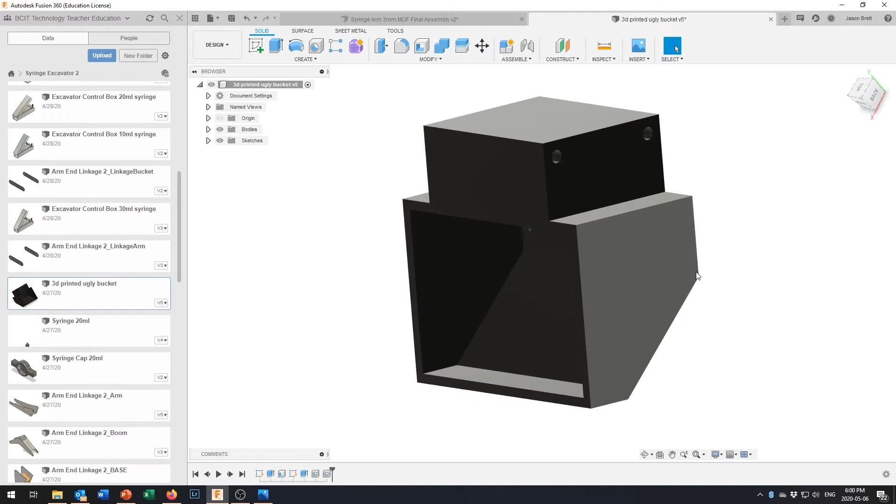Well, welcome back. We're nearing the end of our syringe robot arm excavator project, and today's project is to build one of the very final elements that we need, and that is going to be the bucket for scooping up the dirt out of the pit.

Before we get to building the bucket, let's take a look at what we need to think about. I've started almost all of the videos with a little snapshot of a drawing, and I do have a sketch of where we're going to go with this, but I think it's important for us to take a moment and actually do a calculation, or at least think about the calculation, before going in to start generating our bucket.

The big question we want to answer right now is how much am I going to be able to lift with this arm? Okay, and oh, singe - obviously I don't have spell check in my pen. But let's take a look at what this arm is going to be doing here.

Our arm's right here, and our bucket's going to be out at the end of the arm. When we reach down into the pit, that bucket has to be able to pick things up, pull it out - it's got to be able to lift the dirt. Then we've got to be able to extend that arm out to right here and lift that all the way up. Now we've got one syringe right here pulling this in order to extend this arm.

And we've got this weight out here. I think we're going to be okay for this syringe extending, and it should always compact okay because it's always going to be under compression. The 30 milliliter syringe should have no problem generating enough force to push this entire assembly up. We've got a nice long lever arm right across here.

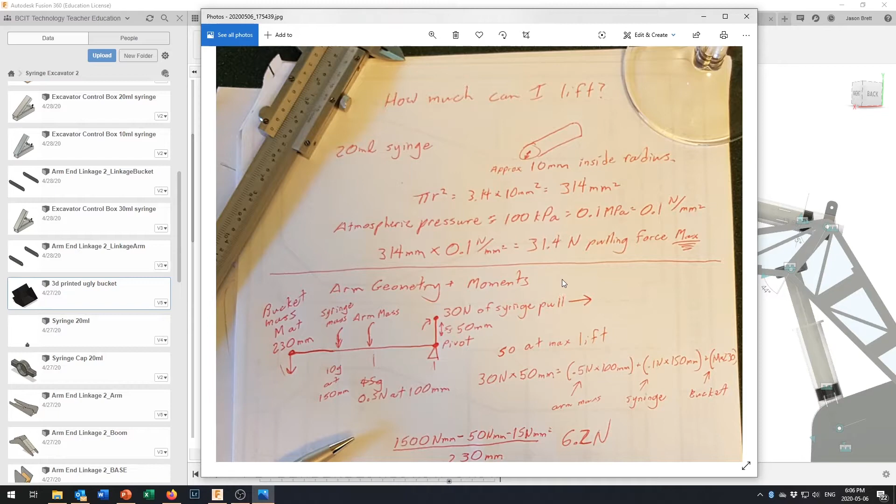Okay, so now let's take a look at how this works out on our arm. So we've got a pivot point on our arm right here, and I've simplified a little bit, moved this up to a nice 90-degree angle so that our math works easier, but I've sort of fudged on the length right in here. So again, we're roughing things out. When you do your calculations, so long as you're reasonably conservative and you don't need to calculate to the nearest significant figure, you can make these approximations to give you an idea of what's likely to work.

All right, so we've got 30 newtons of syringe pull activating right back here. That's going to give us a moment pulling backwards of 30 newtons, and it's going to be activating at about 50 millimeters. Well, where did I get that 50 millimeters from?

Well, I came into this drawing right here, and after doing the little look at right here, we've got this really neat measure tool under inspect, and I was able to come down here and pick that surface - oops, that's telling me 75 for some reason. That's going diagonally on there. I don't know why it picked that. Let's just close that and try that again. I think it gave me the wrong surface because I was just looking at the 2D perspective. And right in there, and I'm not quite sure why it's giving us that blurry figure.

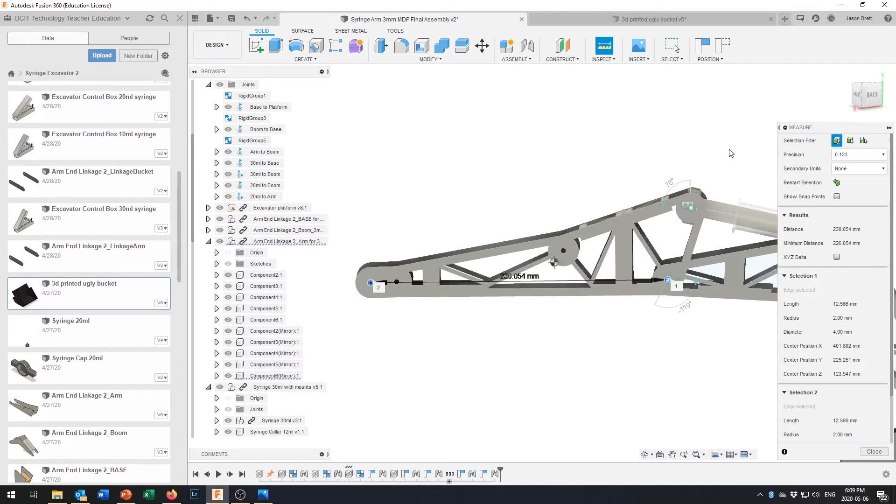Let's take one more measurement and come in right here. And what I want to measure is the measurement to this little point right there. Now, what's that point?

Where did it come from? How did I get it? Okay, so what I did in order to get that point...

I took this piece right here, and you can see I've trussed mine out. If yours isn't trussed out, you're going to have a different mass, and it's going to be in a different place, and that's okay. You'll see here why I think trussing this out makes a difference. I was able to get rid of about half the mass by trussing that out.

But let's come in here at the arm linkage arm right there. So find the object that you're looking for, and if you've assigned it a material, right click on it. What we'll do is pop this up and take a look at properties.

Properties right here is going to give us the mass of this part, and it can give us the mass because it's calculated the volume of that part, and it knows that it's made out of MDF, and it knows the mass of MDF, so our part is going to weigh 48 grams. Of course, I've rounded that off to 50 to make our math go a little bit easier.

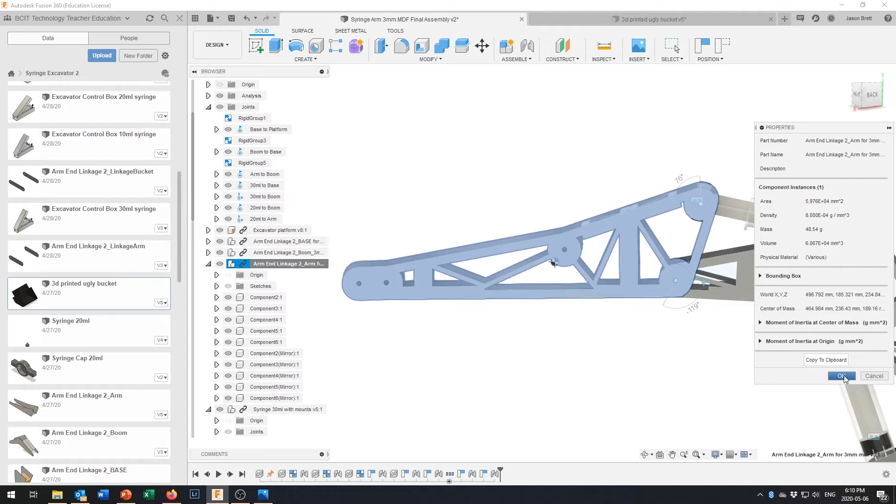Now, the thing we want to know is where is the center of mass for that. The point where this would balance. If you could balance everything on a pinhead, where would that pinhead be to make everything balance? That's what this little glyph, as they call it, is for.

If you come up to inspect right in here, you can pull up center of mass. So if you've got an object selected, just come in here, tell it to show us the center of mass, and you could pick the center of mass for any object right in here.

So for instance, if I needed to know the center of mass for that arm, I just say OK right there. And for some reason, it gave me the center of mass out there, which doesn't really look like where the center of mass for that arm would be. Oh, that's the center of mass for the two combined arms. Pardon me.

Let's get rid of that. This is the center of mass for just this one arm right here. And so you can measure the distance to that.

Let's go to inspect. Pick that hole right there. That's the point everything's pivoting about. And come out here and move this around so you get the center of mass.

Now that's telling me 96 at a bit of an angle. And I think for my calculations, you'll see that we rounded that off again. In this case, we rounded it up to 100.

So we rounded the mass of the arm up from 45 grams to 50 grams, which comes out at 0.5 newtons. We rounded the distance up a little bit to 100 millimeters. Again, not huge rounding up, but if you're going to round somewhere when you're estimating these things, here, this is good, this is working in our favor, so I tend to round up.

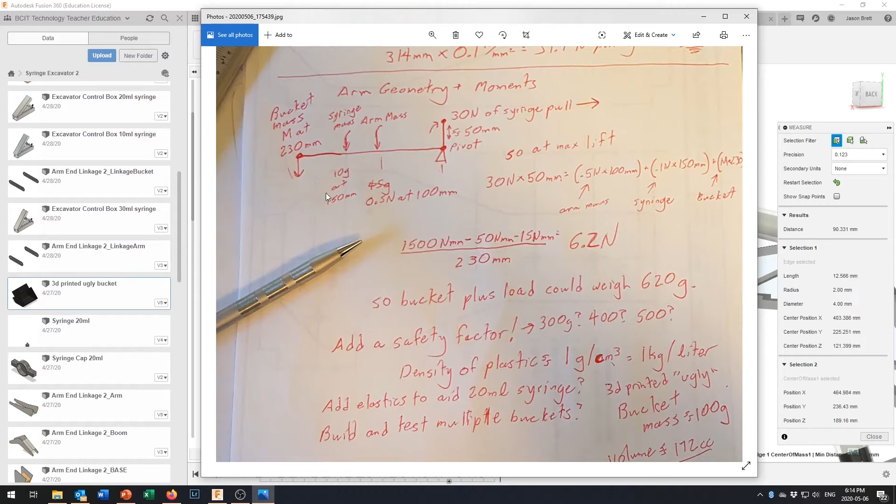That's about 600 grams, which is a lot - like 2 pop cans or something. That's a pretty heavy load, and I don't think we're actually going to be able to lift that much. So what do I do with that number? Well, I say our bucket plus the load could weigh 620 grams maximum, but I really doubt it.

We've got things to overcome, like the friction of the plunger inside the cylinder, the friction between the arm and the boom, and the chance that something's a little bit sticky or not perfectly lined up or not working perfectly. So we're going to add a safety factor.

It depends what you're adding for your safety factor and how brave and bold you are. I think it's reasonably conservative to say that if your bucket plus its load weighs 300 grams, you're probably going to be fine for what you want to lift. If it weighs 400 grams, you'll be working and might start to see some bubbles forming in your arm, but you can probably get it out there - maybe just don't take as big a scoop every time. If you go up to 500 grams, you're probably pushing it.

If you go to 600 grams, I'm pretty sure that's not going to work. So it depends - if you're feeling fairly conservative, make a smaller bucket so you've got a smaller load and a lighter bucket. And if you're feeling bold and want to go for it, make a bigger bucket. You can always make another bucket, because I'm going to show you how to make the bucket in just a moment. It's very parametric, very easy to change, and we've got a couple techniques that make the bucket fairly easy to manufacture.

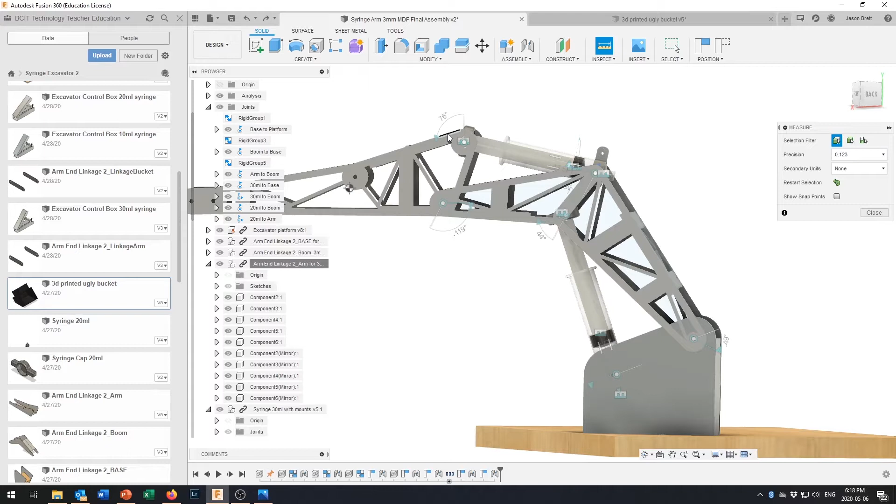Plungers, syringes, cylinders always work better when the fluid is in compression and you're pushing something out, because you don't have the option of putting it into suction—there you're just relying on air pressure. So if you had some elastic bands balanced just right, you might be able to get more force for retracting this and extending your arm.

So you can probably go bigger if you build a bigger arm, and you can probably build a bigger bucket if you use techniques like that. How big? It kind of depends on how good you are at hooking up those elastics and balancing the forces.

So you've got some of that in there. Keep in mind we're going to show you ways to make this bucket that are pretty easy and quick to do, so you might have a couple of different buckets: one is your regular everyday practice bucket, and the big one you go to for competition.

Just as a ballpark, we're going to take a look at the 3D printed ugly bucket. That's going to be the first design that I show you, and then I'm going to show you a sheet metal design.

That 3D printed ugly bucket, when it's all done, Fusion estimates its mass to be 100 grams. It's going to be less than that after we run it through the slicer, because the slicer takes care of the infill density. If you've done 3D printing before, you'll recall we don't actually print solid objects—we give it an infill density. So our bucket mass is definitely going to be less than 100 grams.

One of the interesting areas where parametric solid modeling programs are advancing is in how they model 3D printed parts. Some of them now are starting to do the slicing inside the program, so they can give you the final printed part and its properties. You can come back and do your finite element analysis and mass analysis all based on the part as it's actually going to be after it comes off the 3D printer. Those are new features rolling out in different programs right now, and I'd expect you'd see them being pretty standard in the next 5 years or so.

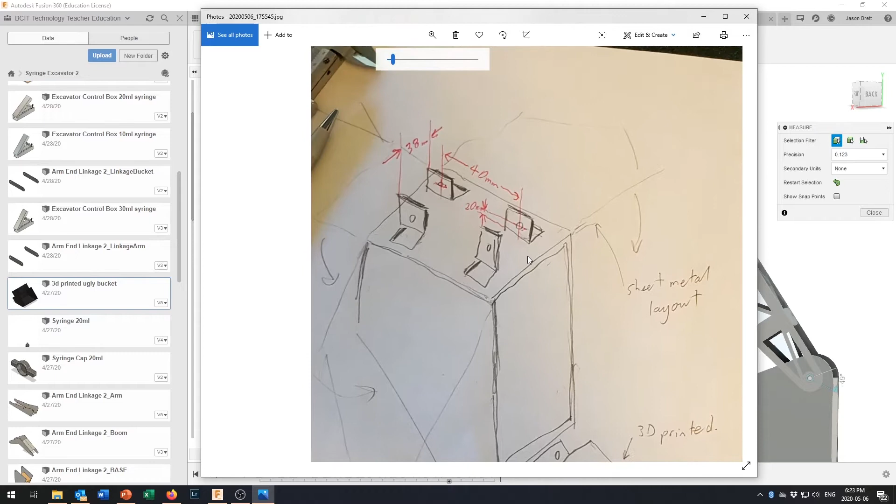Then I was trying to think, well, how do we hook it up into our overall mechanism? What we've got right here is a couple measurements that we already know. If you've got a slightly different design on your arm, that's okay. I'll show you how to get those measurements in just a moment. From outside face to outside face, we're going to want 38 millimeters on my design, and between the holes we're going to want 40 millimeters.

After a bit of playing around with it, I discovered I drew these way too low to the bottom, and that this would have ended up jamming into the arm. This actually needs to come up somewhere around here to about 20 millimeters off the bucket so that there's room for everything to flex and move back and forth before this part jams into the arm.

So where am I getting those measurements from? Well, as you might have guessed, from the measurement tool. Right over here, we can come in here. Let me close this and start a new measurement. If I come in here and pick the inside right there and the inside right there, I've got 38 millimeters on the outside. So if you've got a different design on your arm and you want to go for a different measurement in there, that's perfectly fine. Let me close that.

And for the distance from right here to the end of the bucket, to make sure it all works really nicely, I went back and took a look at our arm end linkage model, the one that we did all up nice and parametrically, where I've got a bucket in there that rotates around. We're going to be able to play with those dimensions a little bit if things aren't working out perfectly.

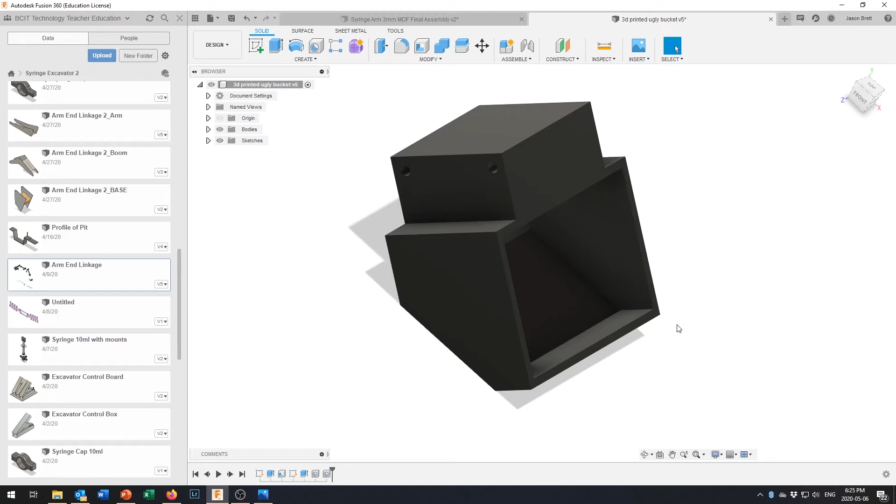This is my 3D printed solution right here. And looking at that, why do I say this is my 3D printed solution? Well, we've got a couple of different... just a minute, I've got to activate my 3D mouse here. For some reason, it always works better if I give it another command first.

Okay, so when I originally designed this, I was thinking that we would end up printing this in this direction right here, because we'd have a nice flat base down here to be our bottom layer that would stick to the print bed. And then you'll notice that my angles right here never exceed a 45-degree angle. In fact, I purposely chose them to be 45 degrees right there and right there. And so long as I don't make those angles too steep coming out this way, you can always print the next layer in your print just a little bit beyond the layer below it.

So we should be able to print this entire model without needing any support material, because this side here also comes up at a 45-degree angle. You might see a little bit of things dropping off right in there.

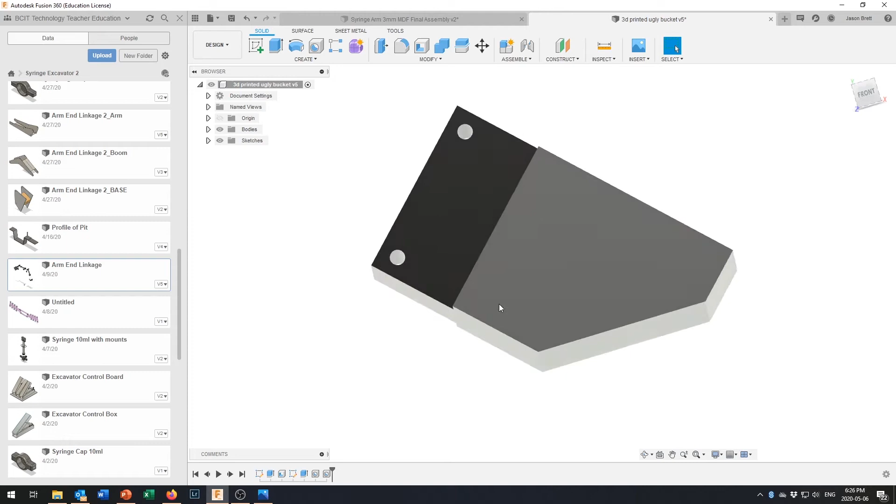Now, after I've looked at it a little bit more, I said, oh well, this is no longer our biggest surface. I had to come up and modify this top part. This would also print really nicely this way. So you can put that down on the bed, and there we go. There's a 45-degree angle right there.

Or what I'm now wondering is the best way... no, that's not going to be the best way to print it right in there, because we're going to have that big flat surface right up at the top. And you need a really good slicing program to be able to knit this top part together when it's unsupported on the bottom side.

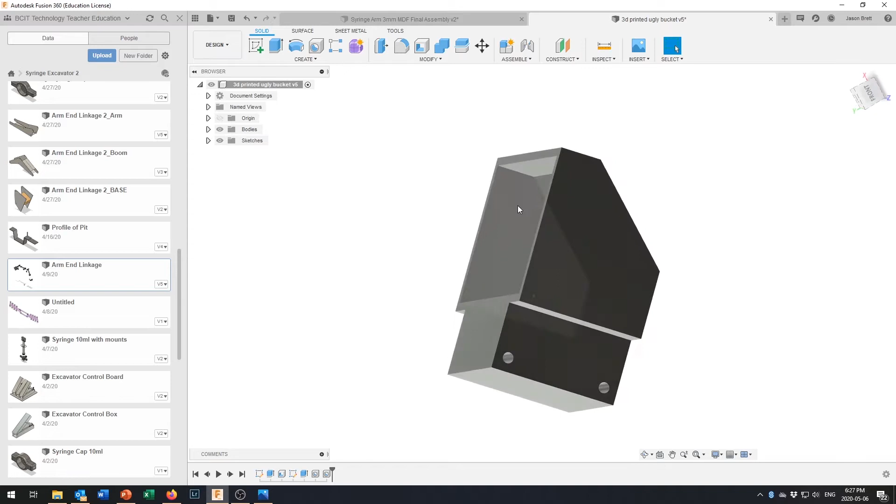So anyways, we've got two different ways that we could print this and make it come together. I'm starting to think that one's kind of nice, but this was my original thought. And you could probably... oh, no, if you do it that way, you've got a problem right in there. So we've got a couple different ways that we can 3D print this shape.

Let me show you how I put this together, because it uses a new tool you haven't used before, and I think you'll really like it. So let's use the history timeline right here. Since I've already made this part, I can drag my history timeline back here, and whoop, that's like I never did any of those things, but it still remembers what those steps were. They're there waiting for me to activate them. You can come back to the beginning and press play, and it will animate the construction and how it all comes together.

Let's take a look at that first sketch I put together. Where did that sketch go? There we go. So all I did was take a look at the profile, and you'll notice I didn't worry about that part going up on the top right here. I just looked at the dimensions of the bucket and said, how big do I want the bucket to be? Honestly, I just ballparked all this because you can come back and change it later if you need to.

But the one thing I made sure of was that when I was dimensioning, I used my dimension tool to set this angle to 45 and this angle to 45. So those parts were in there. This one's a 90-degree angle, meaning this is coming up at 45. So I've got a shape that looks something like that. Now later on when you're all done, maybe you want to fillet a corner or two to make it look a little less ugly. But you know what, 45-degree corners work, certainly for getting all your angles right.

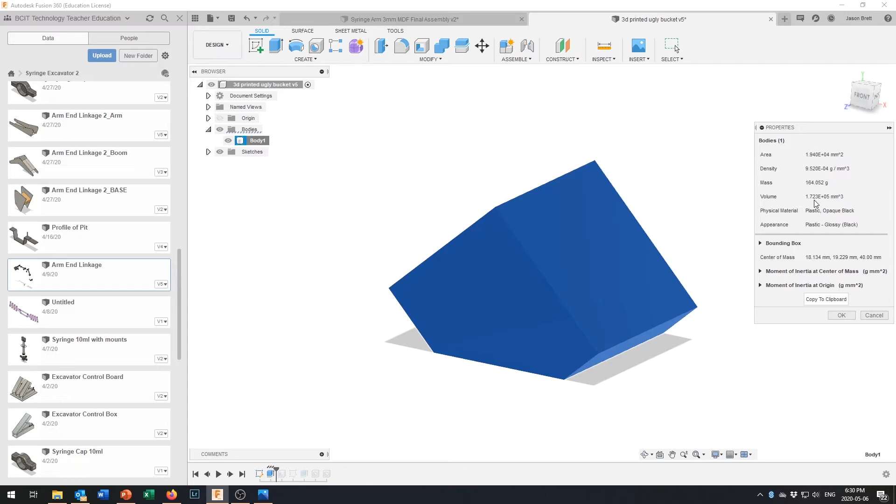The other thing it's got is the volume right here. Now you'll notice this is in millimeters cubed. We want this in centimeters cubed, or milliliters. So remember what I was saying, you've got a factor of 10, but a factor of 10 in height, width, and depth. So that means 10 times 10 times 10, you've got a factor of 1,000. Well, this is 1.7 times 10 to the fifth cubic millimeters. So we've got a factor of 1,000, so we subtract 3. That gives us e plus 2, which means we move the decimal place 2 spots over: 172 cubic centimeters. So that's where that volume measurement came from.

Now this is a tool you probably haven't used before, and it's pretty cool: the shell tool. You'll notice that it just suddenly vacated on the inside right here. So cool. What did I do right there?

Well, there's this tool under Modify, actually it's right up at the top. You click on Shell, and when you've got an object in here, Shell will come in and you tell it which surfaces you want to remove and how thick you want the wall to be. It will go through and remove everything else and just leave the shell of that object behind. So really, really useful tool, and it completely changes how you can design a hollow object. You don't have to design it with thin walls to begin with. You design the outside of the object and then say, make it 3 millimeters thick, please. You just have to remember that you do have to give it an opening of some kind, which is ideal for our bucket because it removed this face right in here and just made everything else 3 millimeters thick.

So that shell tool takes our solid object and hollows it out for us. Now, you can play around with your inside thickness. That's the wall thickness right here. It provides a uniform wall thickness all the way along, and I went with 3 millimeters. That's about 1/8 of an inch.

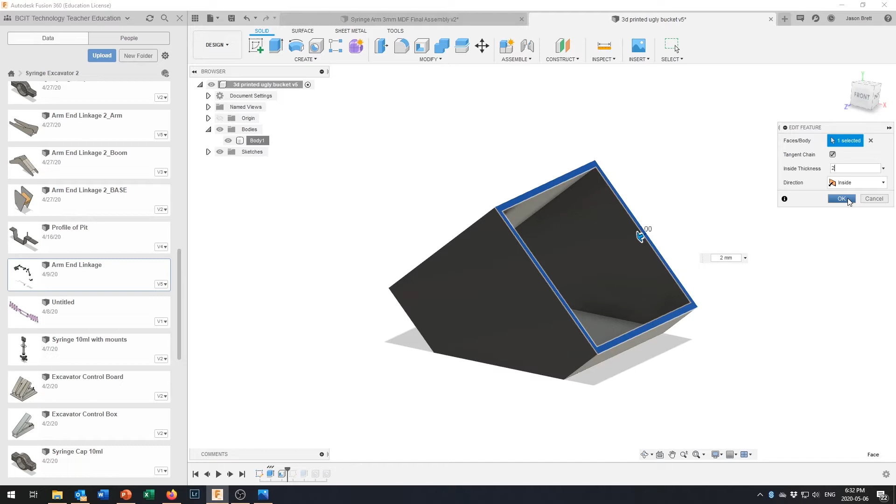Would I go all the way down to 1? Probably not all the way down to 1. But again, it's easy to try and easy to print one out, so when we get back to the shops and you've got a chance to get on the tools, you might choose to do that. So, okay, there we go. We've got wall thickness right in there, just updated that.

And then once we had that wall thickness in there, I came along and created a new sketch because I needed a place to put some holes. Now, this is different dimensions. This was a bucket that I used in my sheet metal design, and there I had to keep the boom and the arm a little bit wider because they had to be able to be bent on the box and pan brakes that we had at work.

With the laser cut stuff, we've been keeping it narrower so that it's smaller and lighter while still remaining nice and stiff. So you're probably going to want to draw a box in here and get it dimensioned.

You can see that I've got the overall dimension right in here. So what I did was I came in and I took a dimension from here to here, and that gives us what's called a driven dimension. You can see that's in brackets right there. When you go to create that dimension, it'll probably give you a warning on that.

You may, in order to make that, need to do a project, and you'll come down in here and you can do a project of it—it'll project that entire surface down there, and then you've got all of these lines in here for making your dimensions.

And then I said, okay, well, I wanted my box to be this wide. I was careful to make sure that I went front edge to front edge. You don't have to—you could move it back a little bit. You can play around with that. Just make sure you dimension it so it's in place.

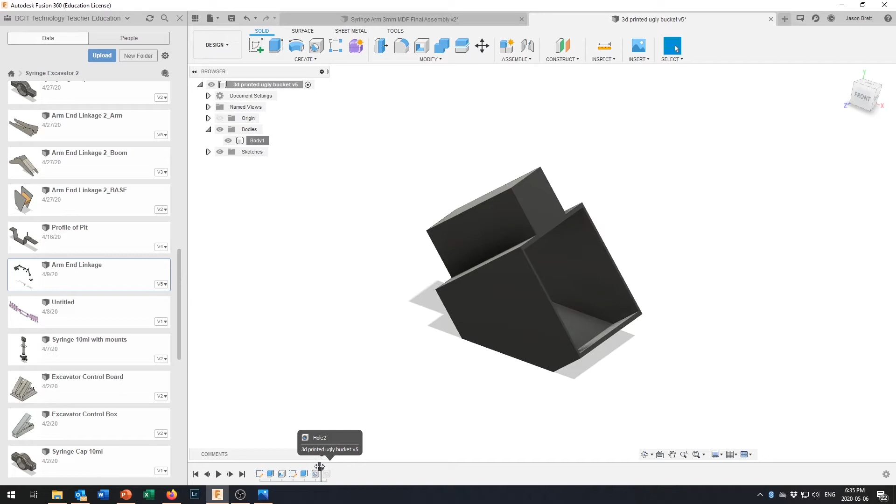So I run the hole command. Oh, let me pull my timeline over one more step. There we go. And if I click on that hole command, remember that you pick the face that you want the hole on, give it a couple of references, and then down in here, you tell it how big you want the hole to be.

And I went with our standard hole for this project, a 4 millimeter diameter, about the right size to let a number 8 machine screw slide through nicely. Okay, so there we go. There's one hole, and then we'll add the other hole in right here. Now we've got 2 holes right in there, and this project is finished, and you have a nice little bucket that you can take into your design and you can mount in there, and your linkage will come down and connect to right here.

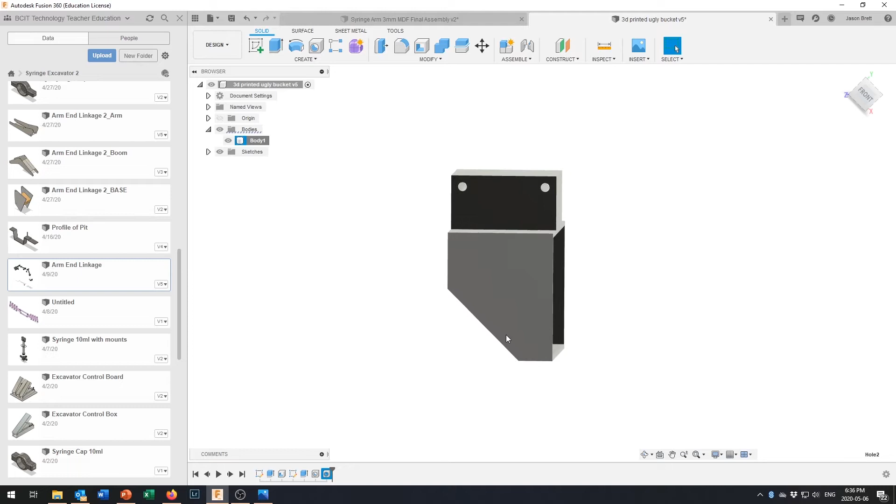Your arm will connect to right here. You'll be able to pull things up, scoop and hold, and dump them out. Can you make it bigger? Yes—maybe by making it longer in this dimension, or deeper in this dimension. Maybe this part right down here comes down a little bit further. Just watch your angles and make sure you always come up with a 3D printable angle.

Perhaps you want to get a bit more space. You could draw a sketch right in here and punch that out to the inside, just so long as you keep it all 3D printable and think about how you're actually going to manufacture it. Should work out fine. Radius off a couple of corners.

Okay, we've got the fillet command for that—can make this look a lot nicer. Just remember, if you fillet that inside corner right there, that's going to make this a little bit wider, and may interfere with the arms, with the sides of your arm that are going to be coming right down in here.

Okay, the bucket is a standalone project. You can build the bucket, it goes into your parts list, and then when you're ready to add it in, you can drag it in right here and add it to this component. But if you're still working on this, don't panic—you can build the bucket. I'm going to be back in just a minute. I'm going to show you how to make it out of sheet metal too.

So if you've got the bucket all made up for a 3D printing file, that's perfectly fine. We've covered how to export an STL in previous files right here. I just want to take a look at how I'd go about designing the sheet metal variant of this arm, or of the bucket.

And one of the things I like to do is, you've often heard me say, is I like to start with a sketch, just so I've got some idea of what the measurements are going to be. And you don't always have to start your sketches blind or from new. One of the things I like to do is combine the currently printed CAD output that I have with the object I want to draw onto it.

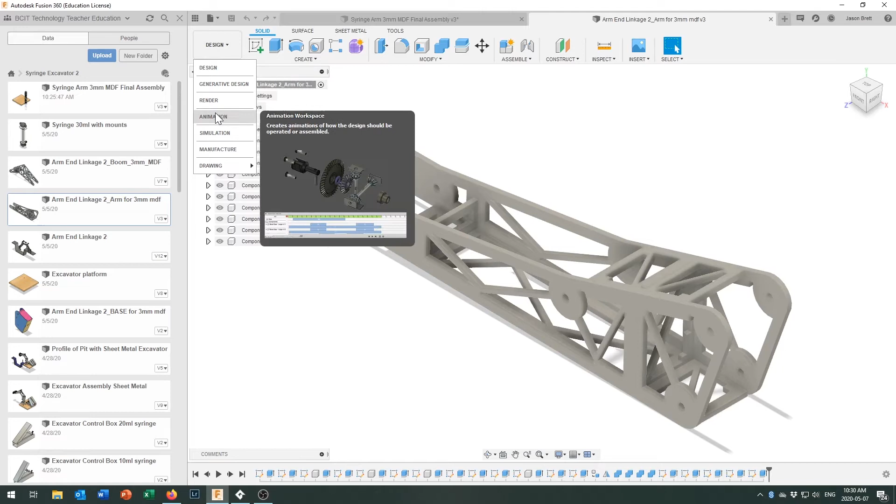And what we're going to do right here is come up to the design and drop that down to drawing, and we're going to say we want the drawing to come from the design. And when I do that, it's going to ask what part I want—well, it's this one right here. We're going to create a new drawing in right here.

And it's going to ask you some things about the template and the drawing that you want—most critically, what size paper do you want to put it on? A4 is the closest approximation we've got to standard letter size paper, and you can choose it in either a wide format or a tall format. I believe this one's going to get me the wide format—if not, I can come back and do this again. But let's go for A4.

It's all in millimeters. And here—there we go. It should have, there we go, popped up, and there's the wide format drawing.

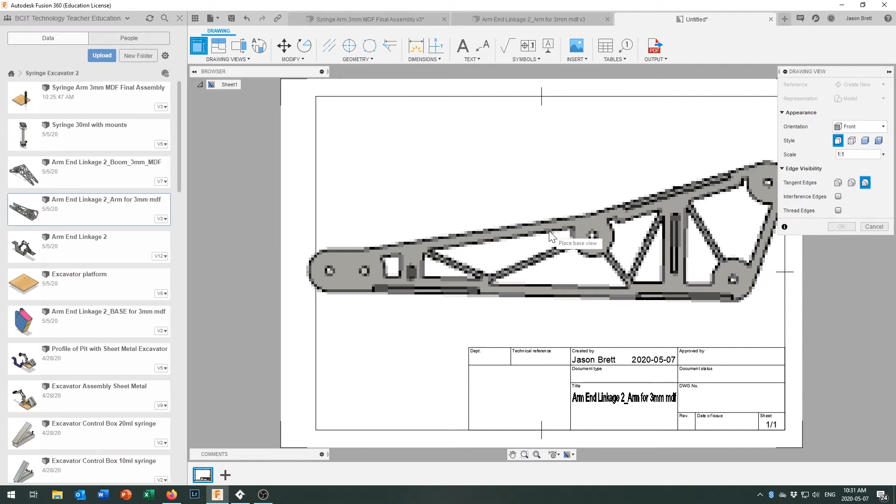Okay, now you're going to be able to place your part in there in the base view, but we want to adjust that scale. So the scale is at 1:1, and that is just barely going to fit in there—it's not going to quite fit inside all the boundaries. And fact of the matter is, I want to leave a little bit of space at the end for doing some drawing.

So I'm actually going to place this over here, not necessarily where I'd be putting it. If I was printing this out as an actual CAD drawing, I'd probably print it out at half scale so that it fit nicely on there. But I want this 1:1, and I want that bucket to be able to fit right in there so I can get a good idea of what it's going to look like when it's sitting right on that arm.

So I'm just going to plop that in right there and say, okay, there's my base view. You'll see that it does a really nice job of putting the base view in there. Shows you the little sections we've cut out for putting it all together. And that's fabulous right there.

Now you've got all sorts of other things down here. You can go in and edit your title block. You can delete the borders if you don't want borders on your drawing. You can delete the title block if you don't want it. Probably not a good idea to do that in general, but for what we're doing right now, using this as a basis for sketching and getting some dimensions, this is probably going to work out a-okay.

So I'm just going to print that out now, and I'll be back with the next step in just a moment.

Okay, I printed that out and then sketched a potential bucket design in on right here. And I think when there's so many ways to build things in Fusion 360... and just as you need to know how to use Fusion 360's tools, you actually need to know how to build things in the real world.

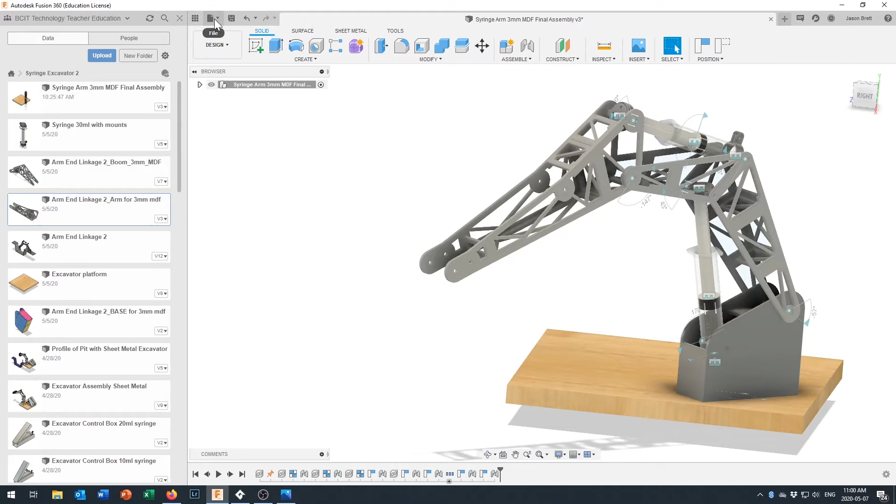Okay, and again, just as with the previous part, even if your arm's a little bit behind and your linkages aren't all working properly, don't worry about it.

You can build the bucket from first principles, and we're going to make it out of sheet metal. So what are we going to need to do? We're going to need to create a sketch, and I'm just going to pick a plane right in here. That sketch is going to be the side profile for my bucket. I really do enjoy Fusion in that I don't have to get any dimensions or angles right. I just go ahead and design something like that, and who cares if it's right or not?

Because what we're going to do now is come along and provide some dimensions. And why is that dimension? What's that little piece doing right in there?

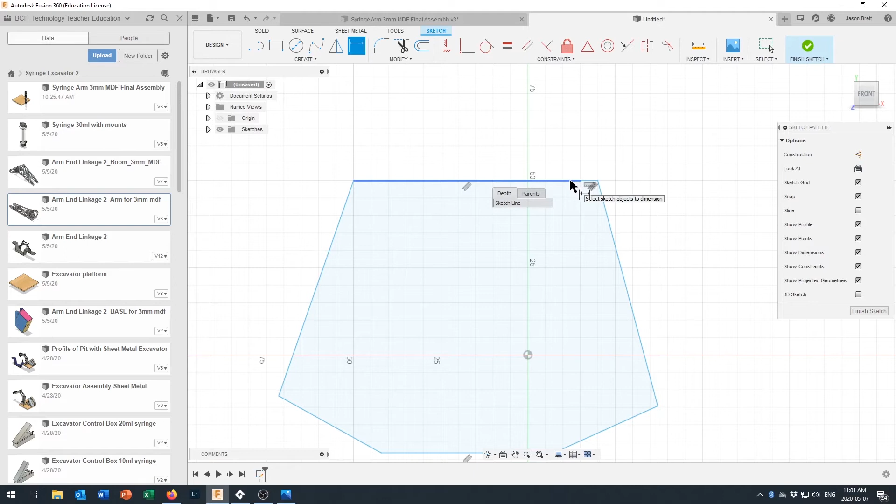Okay, Fusion 360 is messing with me. That should be just a single continuous line along the top right there. I'm just going to delete that and see what happened. Must have had too much coffee and clicked my mouse button too soon.

Okay, there we go. This one right in here is telling you that's a horizontal line, which is good - we do want some constraints on this design. Let's come in here, pull in a dimension right here, and based on my drawing, I think I want that to be about 50 millimeters long.

And then down on the front, I said I wanted this side to be about 70, and you'll notice depending on where I put that, it will either give me an aligned dimension or a vertical dimension. I think I'll go with the aligned along the front, and then I thought each of these sides could be somewhere around 30.

And yeah, that messed it up, but don't worry, we'll fix that up in just a moment. There's no magic to these dimensions that I've got right in here.

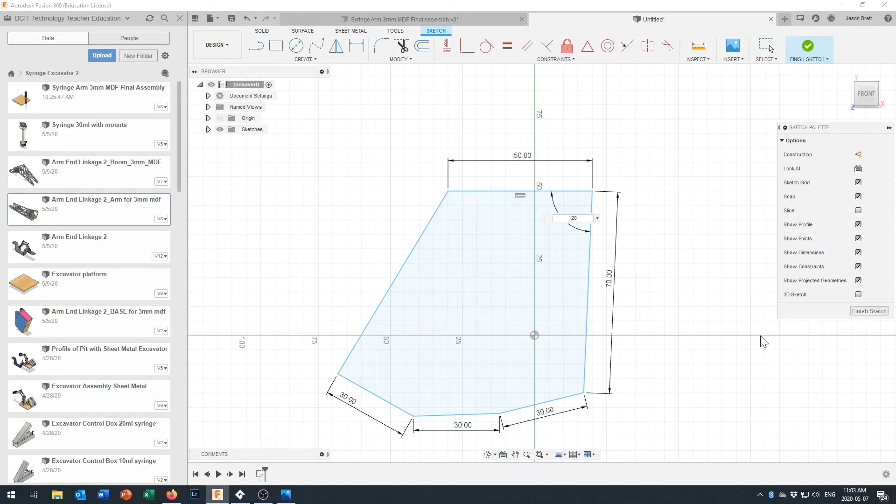Okay, now I'm going to crank this front piece out on an angle a little bit. Right now it's less than 90. We originally had that out at about 120. Let's see what that looks like right in here.

And we get funny dimensions when we come along here, but let's play with that. I think maybe 100, 110, 105 might look good for the front. I don't know, it's your bucket - you decide how you want to design it.

Again, this is one of those things where you'll have to test it, and we probably want this out at a little bigger angle in here. Let's try 100 on there and see what we get. That's looking a little nicer.

And then this piece right here, I think I wanted that - actually, instead of putting a dimension on there, I'm just going to make that go horizontal. There, it was already selected, so when I clicked on the horizontal constraint, it just made that horizontal right along the bottom.

And then I can dimension this angle right in here, and that's telling me, let's make it 150. And then just to wrap that up, I think this is going to tell me that this is an over-constrained dimension, so I'm not going to put a dimension right there because this angle and this angle are controlled by these lengths and dimensions we've got along here.

It knows if this one's horizontal, and this is all in here, we've got this all fixed, and that's looking really good. Okay, so that's going to be the profile of our bucket, and I'm going to finish that sketch.

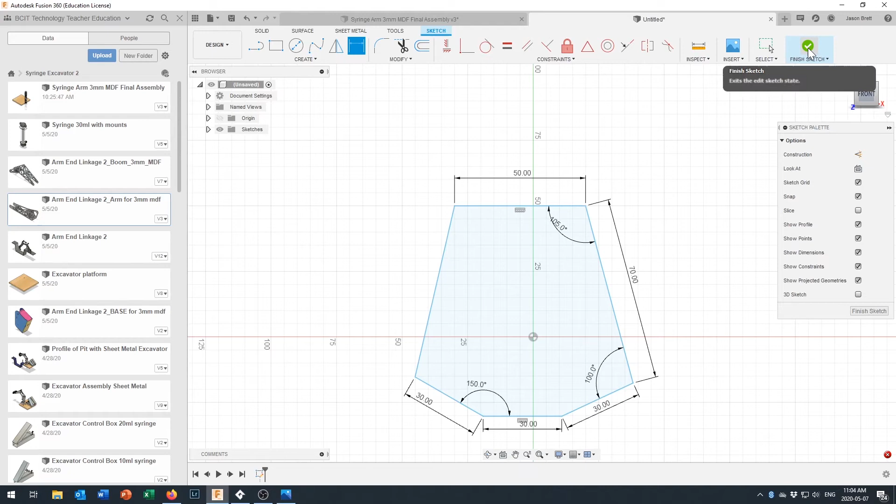And then I'm going to take that and extrude it as a new component. I am going to extrude it 1 millimeter because most of the sheet aluminum I have kicking around the shop is about 1 millimeter thick. There we go, now we've got this 1 millimeter thick piece sitting right in here.

Now what I want to do is convert that to sheet metal. Under create, we can go convert to sheet metal, and I'm just going to pick that component and tell it that I'm going to make it into aluminum 1 millimeter thick.

If you don't have an aluminum setting in here for 1 millimeter thick aluminum, you probably do because we used aluminum in an earlier tutorial. You can come into your library and click on an existing material - that's covered in a previous tutorial, the one where we made the control box. Go in there, edit this, and pick 1 millimeter thick aluminum, and we can fix that up later if needed. Now this has turned into a 1 millimeter thick piece of aluminum.

I am going to create a flange, and that flange is going to come off the top side right here. It doesn't matter so much which way it comes, but I'm going to put it there and have it come out about 35 millimeters. We are going to end up mirroring this part and putting it onto the other side, but for now we're just going to build half of this, and tweak it later.

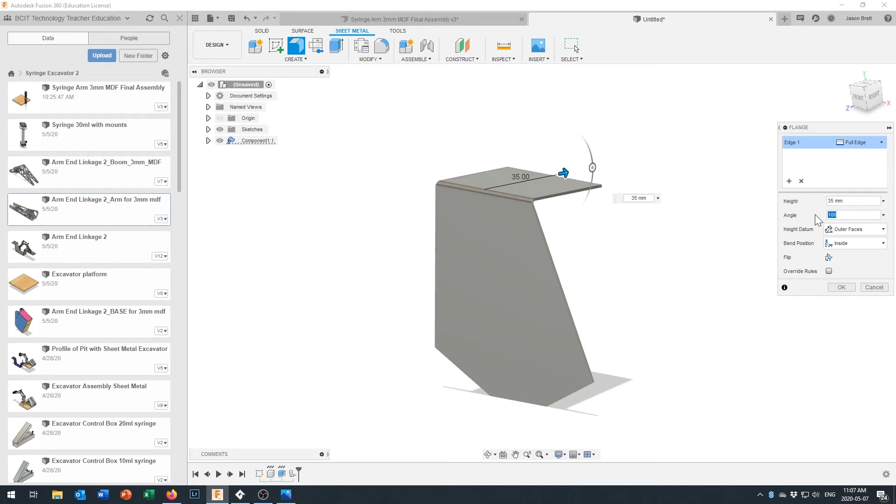It doesn't have to be 90 degrees. It could be 100 if you wanted this a little tapered for fitting into corners better, or it could be 80 if you wanted it a little wider for not fitting into the corners. But 90 degrees is a nice easy bend.

One of the nice things about doing this in sheet metal is you can see that it actually turns that radius in. Keep in mind that when turning that radius, it's measuring on that line - in this case, looking at that face, it's measuring from the inside of your sheet metal, and should only be measuring to that end right there. So just keep an eye on that.

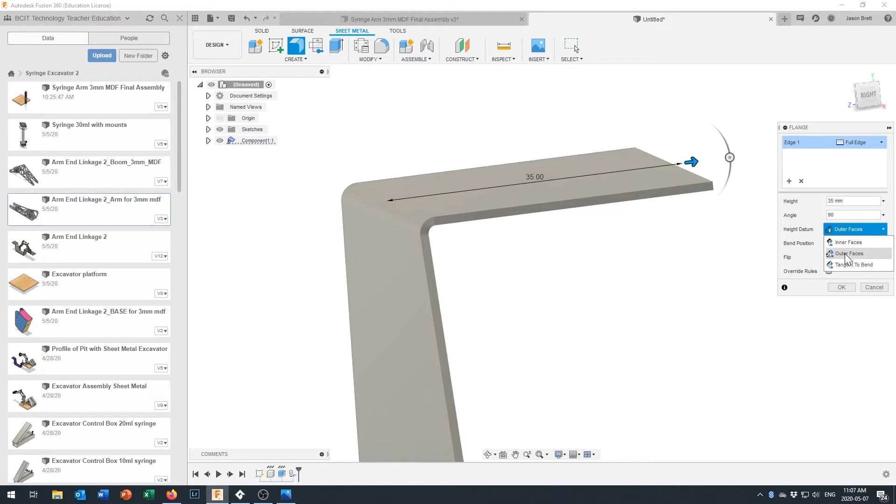It's controlled by your height datum, and you could go to the outer faces, and then it should have that arrow come out to this side, with your bend position being inside or outside. So you've got some different parameters you can use to adjust, and we're going to use those helpfully later on when it comes time to create our flanges.

Okay, and we put that along the full edge for 35 - that looks good. I click OK, and now I've got one sheet metal part.

Now what we need to do is create a sheet metal part that's going to come down around the back right here. So I am going to create a sketch that comes in on this back, and put it on this plane right there. Okay, and it's just going to be a rectangle.

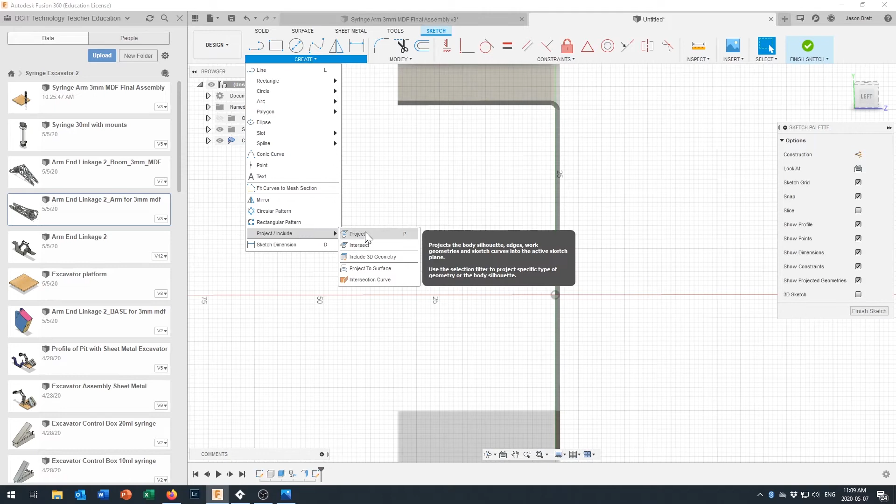Actually, before we put that rectangle in, let's just project this sheet metal edge into the drawing. Now let's create a rectangle from this corner down to that corner - there's our 35 millimeters right there - and we will finish that sketch.

So you can see we're going to have a piece of sheet metal coming right in there, and that's going to come right out to that edge. So what we're going to do now is take that piece and extrude it. I've got to go back to my solid tools, extrude this by 1 millimeter, and I'm going to create that as a new component again.

And then I am going to convert this piece into sheet metal. So back to our sheet metal tools: create, convert to sheet metal, and again, aluminum 1 millimeter. There we go. Now that it knows this is a piece of sheet metal, we can add it right down here, and put a flange coming off the bottom. Okay, and let's make that flange.

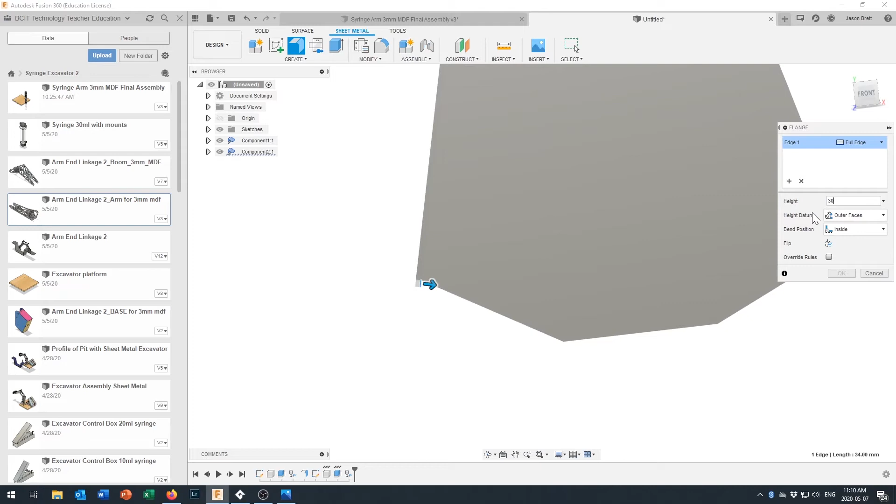We know it's going to be about 30 long, but it's not at 90 degrees - that angle will be less than 90. What did we say? 80, 70, is that a 75?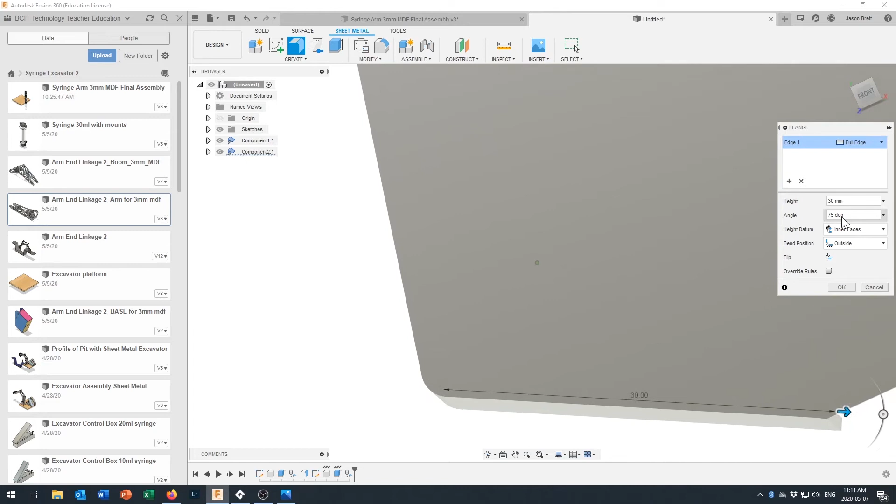Let's see right in here. Now this is where we want to watch where our dimensions are. I think we want a dimension to the outside right there on that curve, because we want to make sure we come out and around this corner. Now it may be necessary to put a radius on this corner to fit the inside of our sheet metal, but that one's not quite coming out at 75 degrees.

So if we need to find that exact angle we want the bend to come at, just come back into component 1, into your bodies, body 1 - sorry, maybe that's under sketch. That was in sketch 1. And I'm just going to click OK on that for now. I want to take a look at sketch 1, and we can do a dimension on here.

107 degrees. That's why I was having a hard time finding the right dimension. Okay, finish the sketch. Escape gets us out of there.

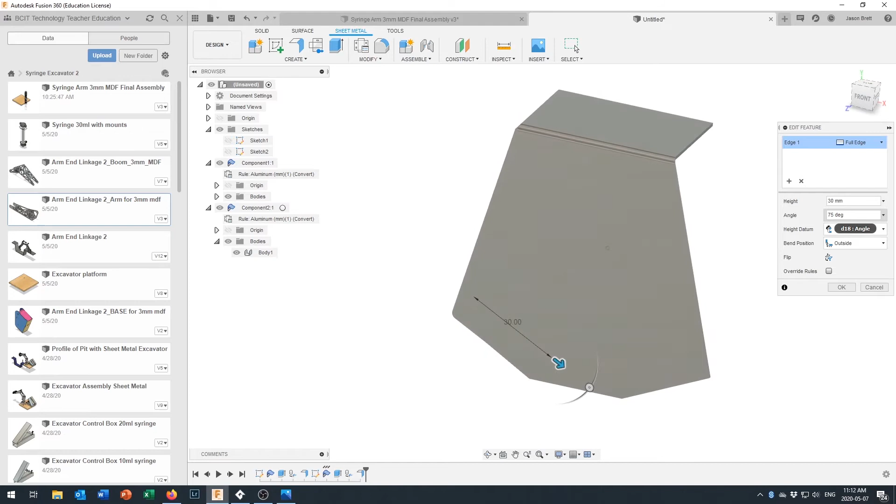We didn't change anything. And in here, under component 2, aluminum component 2, there's a body right in here. We're building that up, and we had an edge flange in here. We want to edit that up. So 107 degrees - we're working at this from the other side right now. I'm just going to turn on my component color cycling so I can see these things a little bit better. Makes that stand out really nice.

180 minus 107 is going to give me... 180 minus 107 is 80 minus 7 is 73 degrees. So we just measured that right there, and now you can see that's lining up right around there, and it's coming around the outside nicely. Good. Okay, now let's do an OK on that.

We've got that in there. So now we'll probably want to come back and fillet these corners just a little bit in our original drawing - just something to keep in mind. But let's come in and create another flange since we're in flange creating mode.

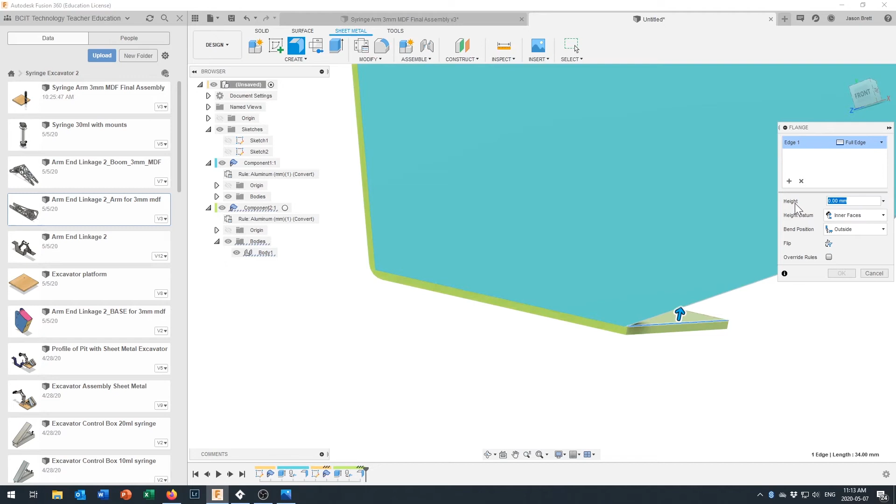And here we go. This one we also set to be 30, so we'll take that out 30. And I think this was a 100 degree angle, so let's try - so that would have been 90. 10's not enough. There we go. That must have been a 150 degree angle in there before. And that comes up right around there. And I'll click OK.

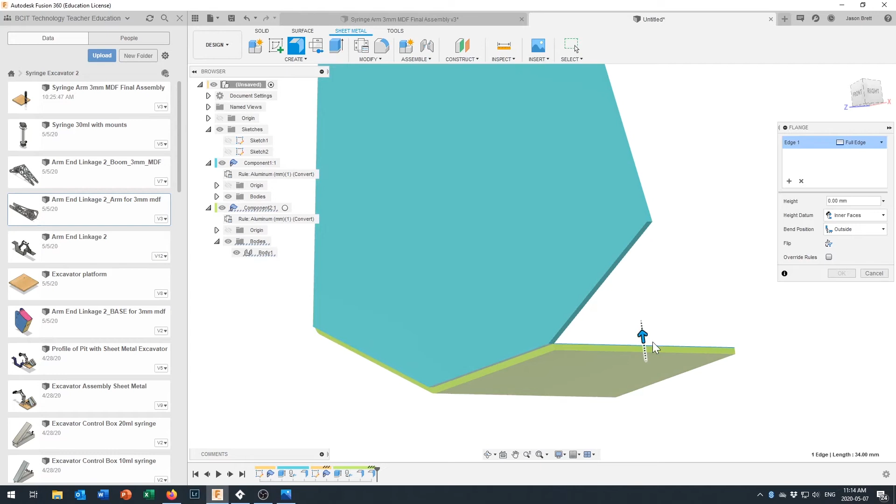And let's put a flange right in here. This is also going to be 30 again. If you had different measurements, you could come in and figure that all out. But instead of being at 90 degrees, this is going to be 40. Is this at 30 as well? There we go, and that comes through. And that piece of sheet metal, if we bend it absolutely perfectly, is going to come through and meet right at that location. And that looks beautiful.

That's going to form the back and come right all the way around here over top of everything. Beautiful. Now we just need to create some flanges on here. So I'm going to say okay. Now this is the tricky part where sheet metal gets interesting.

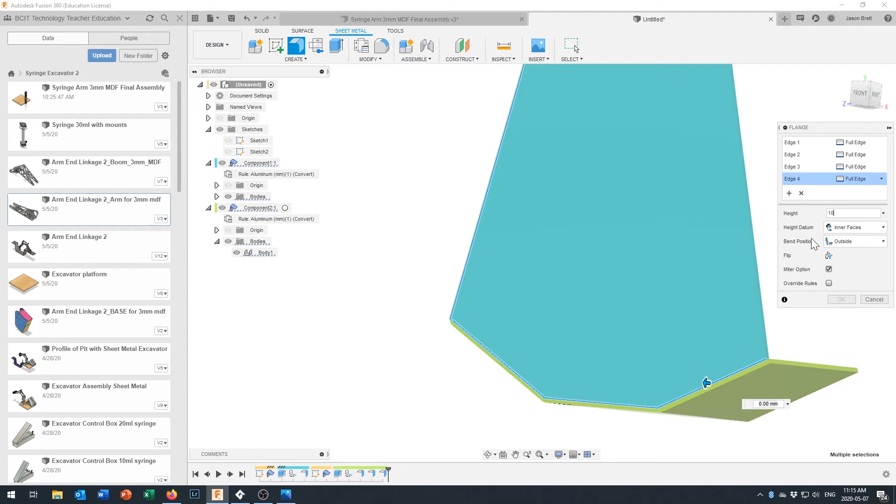Let's come in here and we want to flange here, here, here, and here. So we've got all those flanges coming inwards, let's just bring them in. Oh, sorry, picked the wrong thing. Cancel that.

Those two parts are so close together. To make this work, what I'm going to do is temporarily hide the first component - that sheet metal part right there - I just want to take a look at these parts right here. And let's put our flange on right here. Okay, there we go. Now I can unhide that first component so I see how it all comes together.

And let's try a height of 10. Now we've got a problem that everything's kind of overlapped right in there. So let's try our bend position. If we move it to inside, that will have that all bend up and tuck on the inside of this piece, which is kind of nice, but it leaves that sharp edge exposed there. I'd like to see if we can get that. What happens if we go tangent to bend? No, outer faces.

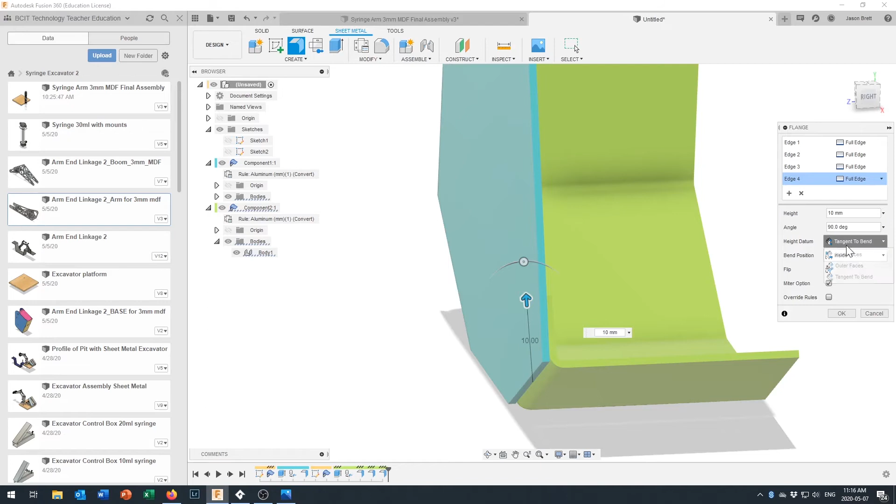Adjacent, there we go. That comes in, wraps right around there. And what you'll notice is that it's smart enough to know that right in here, it needs to leave some gaps so that when it makes those flanges, it doesn't start bending into itself. So when we go to lay everything out and create our flat pattern components from this, it's going to come out pretty nicely.

So there we go. There's half of a bucket right there coming together. And if you want the bends on the inside, you can put them on the inside too. That might give you a little cleaner look from the outside. I don't know why I thought I wanted them on the outside.

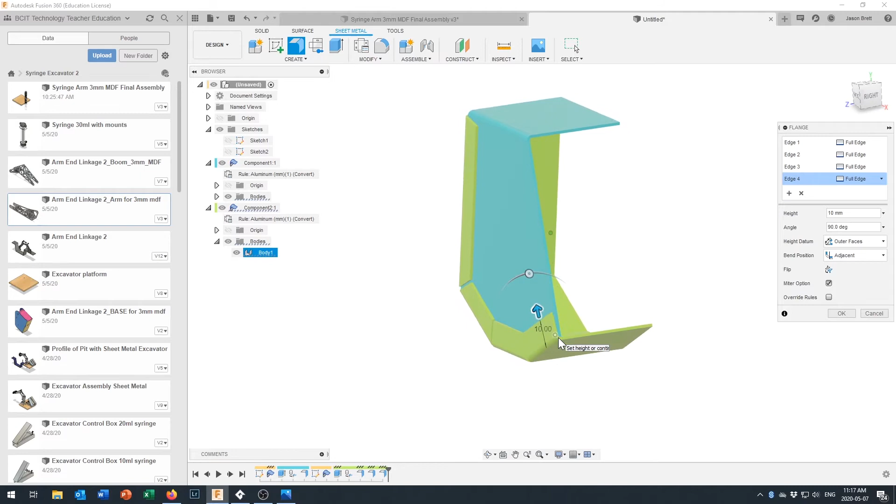Like I say, there's many different ways that you can assemble this and make it work together and have it come out really nicely. If you wanted, right up here you could add another flange and tuck it in underneath here and have a couple pop rivets come down from the top so that it's all tightly sealed on the inside. So, okay, that's looking pretty good to me.

And now we just need a way to mount this onto our arm. So here's our sheet metal part right now. I think we're going to put a new sheet metal part right onto the top and we're going to pop rivet it down there. So let's come back to create a sketch.

Let's create a sketch onto this face right here, and we'll project this surface so we've got that to refer to. We'll say okay, now we've got that surface in there.

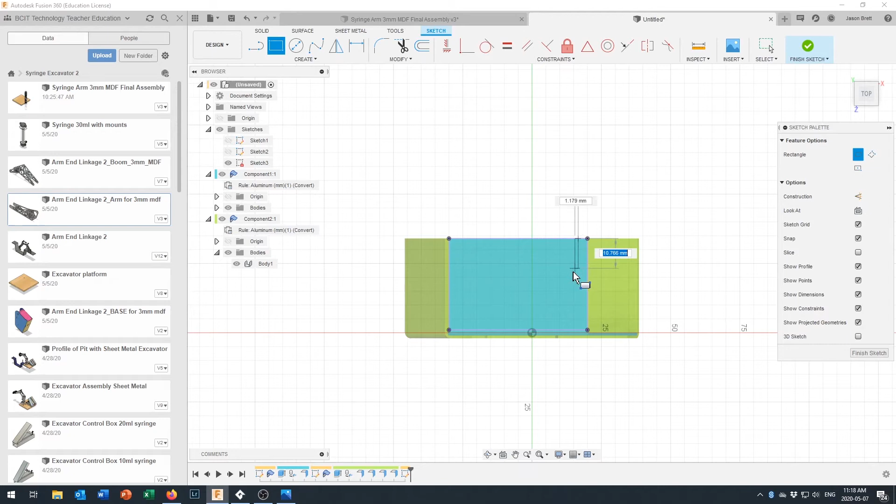Then let's pick something that's going to run not all the way along, but almost all the way along, right in here. And there we go. It doesn't show up all that well because of the color cycling that we've got turned on, but we can still dimension it a little bit.

And so let's come in here and we will dimension this side right here. This is going to tell us how it meets up with the inside of our arm. So again, if you've forgotten that, you can come take a look in here. You can go and say okay, I'm going to do an inspect, and I'm just going to measure from right there over to right there.

And our internal dimension is 38 millimeters. So this is going to be half of 38 millimeters, which doing math in my head is 19. Okay, so that's going to come up to 19 right there. We are going to check when we do all of our folds to make sure that that is the right size. But right now we can dimension how far back do we want it from the front.

Pick up my dimension. We want to dimension this distance. New dimension. Escape, quit dimensioning the wrong thing. Want to dimension that line to that line. There we go. And let's set that back just a few millimeters from the front.

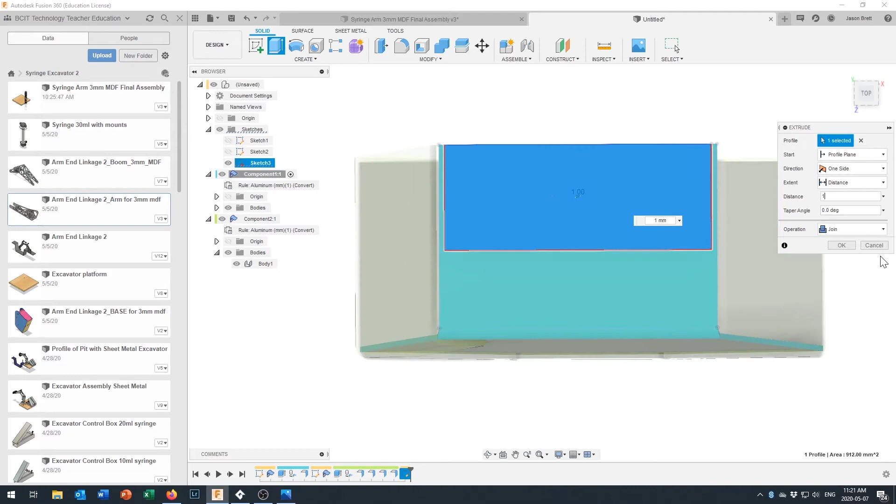Okay, so again, finish your sketch right on here, and let's come back to solid. We'll do an extrude. Take this piece, extrude it by 1 millimeter, create a new component. Okay, and now we've got that piece sitting right on there. Come back to our sheet metal, convert that into a sheet metal part of 1 millimeter thick.

Okay, and now we can create a flange coming up from right here so that this can come up and touch. Okay, now like I say, we just want to remember that this bend position was on the inside right there, so that we're at our 38 on the outside. So that's looking pretty good coming right up in there.

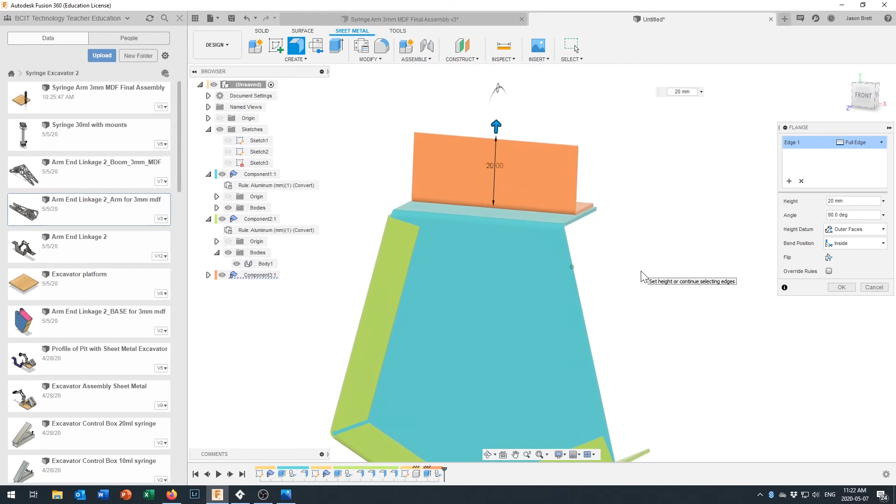And I'd say we've got half of our bucket right now. Okay, so looking pretty good right on here. And now what we're going to do is we're going to add a few features. Oh, sorry, it's 20 millimeters to that hole.

I just should have extruded that a little bit longer, so I'm going to come into this flange right here, and I should have made that—it's going to be 20 to the center, so 2 on the top. Let's go 25. Beauty.

Okay, so now we need to put some pop rivets in holes here for holding everything together. Typical pop rivets in the shop are 1/8 inch diameter, or 3 millimeter, so we need some 3 millimeter holes inside here, probably a couple right through here. We'll do that in the solid mode.

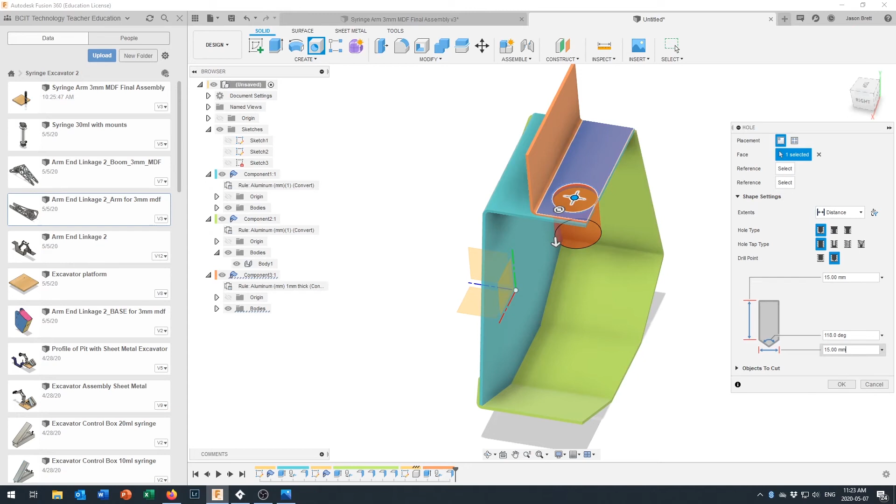Come in here and we're going to create a hole on this surface, a little bit bigger than we need. On our hole tool, we tell it we want it to be 3 millimeters in diameter. It knows which face it's going to be on. We'll pick a reference side right in here, and pick right there. We'll set it in 10 millimeters from the edge.

We want to leave enough space right in here so that our pop riveter can get in there, so let's set that to only 7 millimeters. Again, this is going to get mirrored over onto this side. We'll put another hole on the back right here.

Okay, it remembers that it was 3 millimeters. We pick our 2 sides, and we'll say 10 millimeters, and for reference 2 we'll pick that side, and set it at 7 millimeters. That goes right through there, a couple of pop rivet holes.

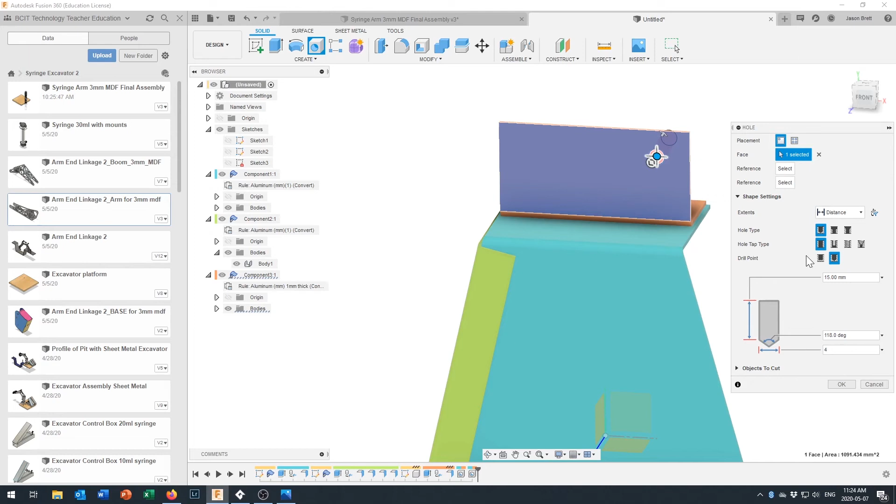We're also going to need a couple of holes up here for mounting this onto our robot arm. Those are going to be 4 millimeter diameter holes, so let's pop a hole in on this surface right here. We'll bump this up to 4 millimeters to fit that number 8 screw, and just be careful which reference edges you pick. We're going to pick that edge, that edge.

We'll set that back. They've got to be fairly close together, because we need to space them apart by about 40 millimeters. So let's say this one is going to be 8 millimeters back, might be closer to 6 millimeters back from the edge right there. And actually, for our second reference, I want to undo that reference.

I want to select a different reference right here. I got rid of the wrong thing. I'll select a reference right here instead. There we go, leave that one at 6 for now.

And for the second reference I'll select down right here, and let's bring that up about 20 from the bottom. Now there's that bend right in there that brings that up 2 millimeters extra, but let's make it 18. I think that'll look a little bit nicer, and it'll let us radius that corner a little more closely in line with what's going on right there.

But we've got a few other things to play with first. So there we go, there's one 4 millimeter hole. Let's create another one on this surface down here, and the first reference we want is from the center of that hole.

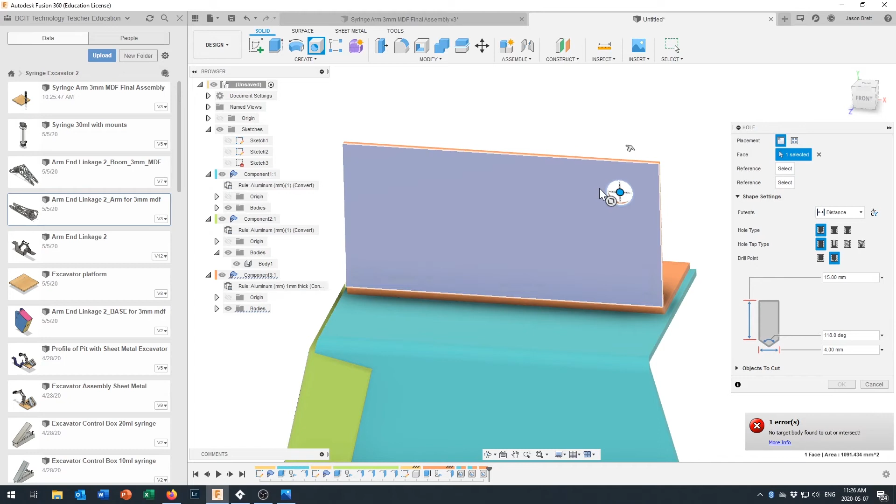Create a hole on here, it's 4 millimeters, reference one from the center of this hole. It's still trying to create that. Okay, well, we'll come in here and figure out how to dimension this one exactly the way we want in just a minute. Let's measure from the front right back to there.

We made that 6 back for the first one, so this one then would be 46 back. And then we'll take the second dimension right down here, and we made that 18.

Okay, and now I'm not quite liking how that sits right on the end, so I'm going to come back and find this hole, and that first one I'll take down to 4 millimeters. And the second one, if I want a difference of 40 between them, I'll take that down to 44. They're sitting in there reasonably nicely.

Now, if you wanted to get really fancy, you could use the rectangular pattern and put a pattern of holes right along here, pre-punching a whole bunch of different holes at different spaces so you could adjust different lengths when you're actually using your arm. Or you could just try popping a few holes in with a hole punch once you're done. Anyway, there we go, we've got some holes mounted right in there, and that's going to enable us to mount this to our arm.

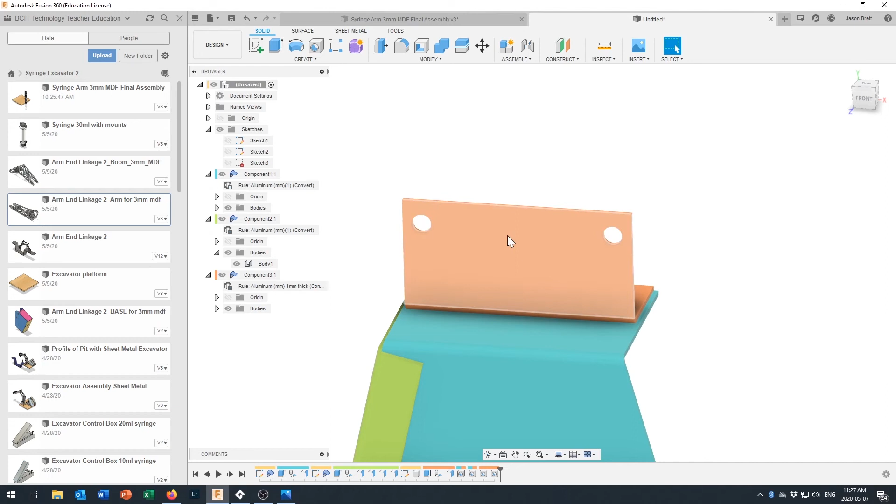I think while we're doing that, let's come over to our sheet metal, and it's got a fillet command, so let's just fillet off this corner of our sheet metal right there, and let's take that to, I don't know, a 6 millimeter radius.

Okay, let's add another edge right there. We'll put that one up to a 6 millimeter radius. And then we've got those two sides because we don't want sharp corners poking around and scratching people. That's just poor sheet metal design. Okay, there we go. That's looking like a part we could mount onto the top right there.

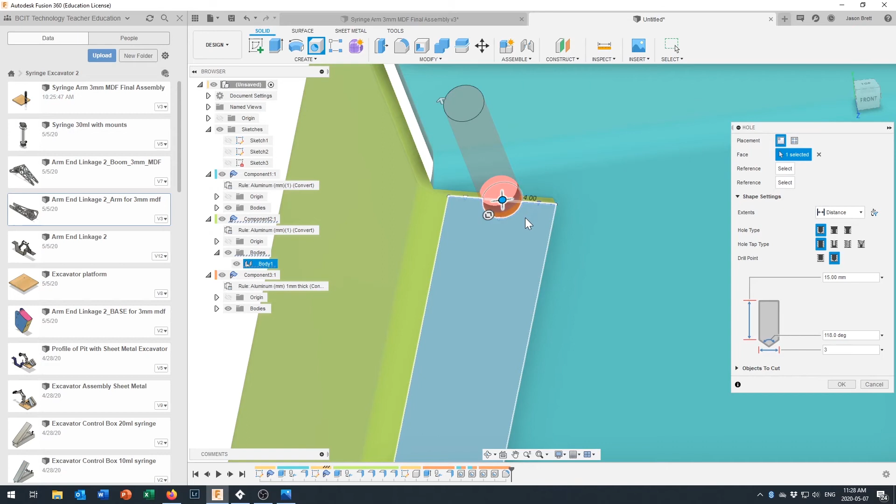We'll add a couple more holes along here. So we'll come back to solid, hole, pick something right there, 3 millimeters diameter again. Reference edge, zoom in a little bit right here, select a reference edge. One, and let's drag—we didn't want to drag that.

We want to drag that down right there. I dragged the wrong thing. I changed the diameter, set it back to 3, select this reference edge right there, and we'll bring that in. Let's see what's going to be nicely radiused. We can probably do that 3 millimeters from the corner, and then we'll make it 3 millimeters. Wasn't where I wanted it. Thankfully we can undo that.

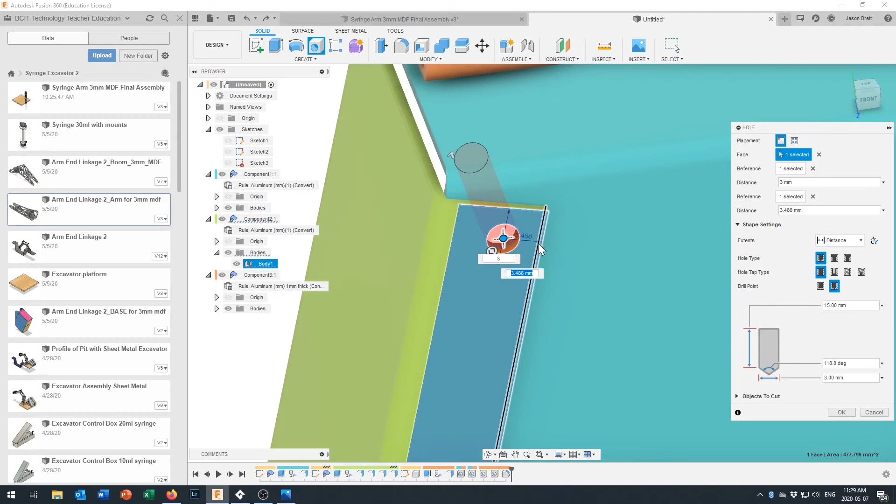There we go, we'll put it down there. Reference 1 from that edge, 3 millimeters. Reference 2 from this edge, 3 millimeters. There we go, and that hole punches all the way right through both those parts. Let's put another one in right down here. Put it in here somewhere so that when we dimension it, it stays where we want it. And we'll dimension it from this edge, and put that in 3 millimeters.

And then from that edge, I'll make it stand back 3 millimeters as well. It's getting pretty close to the edge in there. The pop rivet head might stand out too far, in fact, and might sit over the edge. Let's go back 4 and 4. Yeah, I think that should work pretty nicely. Looks like we've got room for a pop rivet head to fit on the inside in there.

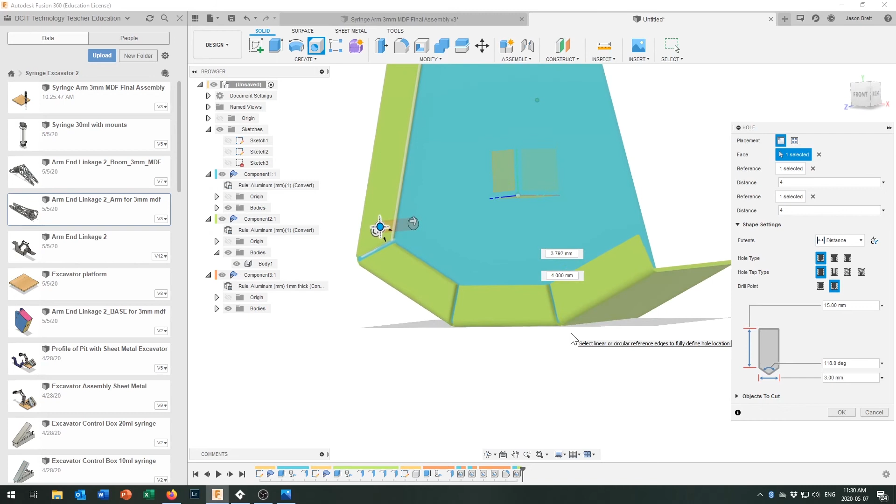Let's fix that previous hole so it comes back 4 and 4 as well. Yeah, that looks nicer.

As you can see, I'm pretty much just playing at this point because we've already got a couple of different designs on here. But as you get going with Fusion, it is kind of fun to play with it and say, I can do all these different things, and it doesn't matter if I don't get it absolutely perfectly right the first time.

Oh, this one I actually wanted to be a little further along from that edge because I was only going to put one pop rivet in here. Let's put that hole in right about right here. Drag it up somewhere in here. We want that to come right through at the center of this piece right here.

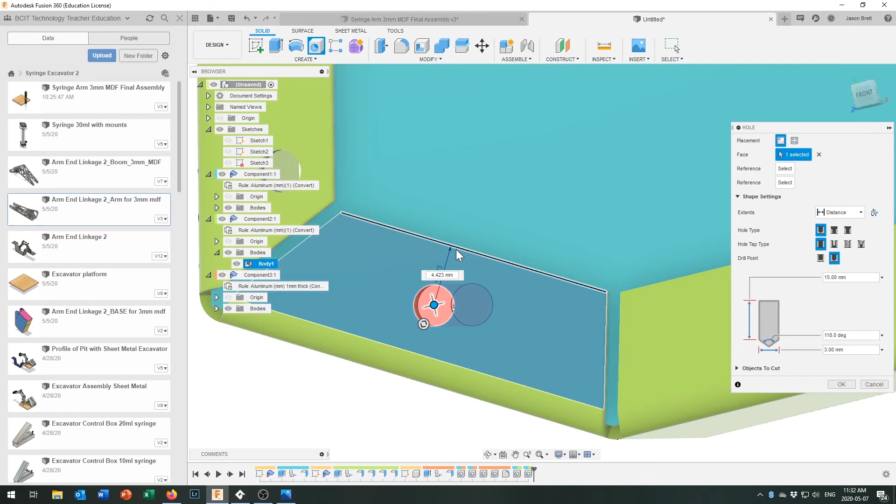So let's add a dimension right here. We'll reference that to be 4 millimeters in. Okay, and then our reference right here—let's see, where do we have a nice straight edge to reference a side? It's going to be a little bit trickier. Ideally, okay, I am going to select a reference right here, and let's see.

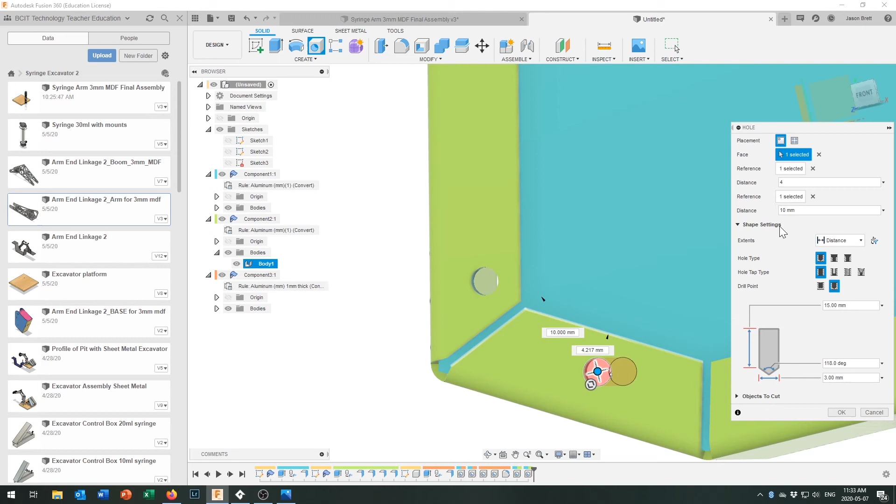I'm having a heck of a time picking up a corner. I wanted to be able to get a corner in there, but we'll just take that and let's see what happens if I tell it we want that to be 10. Can we bring this back to 4? Is that going to conflict? Yeah, that's pretty good, right in there.

And then we'll come in here and we'll put a hole on that face. Reference edge 1 is going to be right up here, we're going to make that to 4. Reference edge 2, make that to—I think we did 10 last time.

Why does that tell me that shrunk down to 4, 3? We want that to be at 4. Yeah. It's going to work fine right there, just something to hold that little flange in. In fact, that one's probably not critical that we pop rivet it in place, but you can play around with it a little bit later on and get it exactly where you want it.

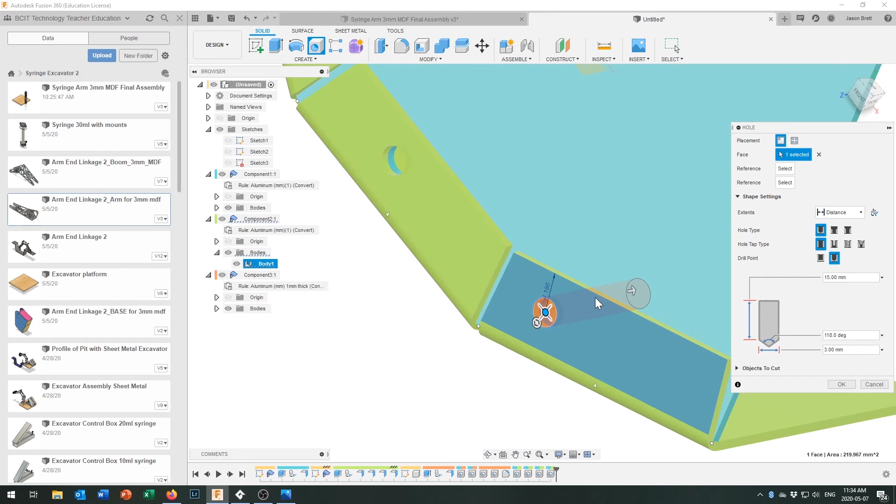Right in here, 4, and I think we did 4 on one of those before. And then we'll put 2 pop rivets in here just because it's down at the bottom and because the pop riveter is fun to use. Just drag that in a little bit, and then we can select a reference and go 4, and select the next reference and go 4.

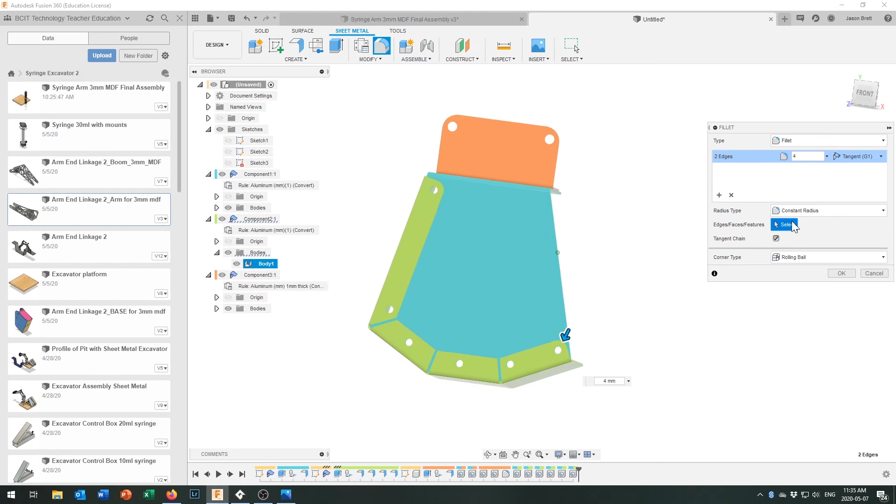That's looking pretty good. Now, once again, I don't like having sharp corners on sheet metal anywhere, so we're going to take these corners right in here. We're going to come back to our sheet metal tools. We'll do a fillet on this corner, and we'll do a fillet on this corner right down here. I guess we could do a chamfer, that's easier to cut, but either way, we've got 2 of them on there, with a 4 millimeter radius around there. Just reminds us to file those corners off, round them off nicely, and we should be good.

Don't have to worry about those ones so much because they'll all be tucked in and out of the way. Okay, there we go. We've got half of the structure all put together. You'll remember what we've done in the past when we've had half of a structure put together is that we go ahead and we do a mirror.

Okay, so what do we want? Well, we want mirror components. 1, 2, 3 components are going to get mirrored, and our mirror plane right here is going to be that seam like so. And there we go. We've now got a mirrored part right here. There is our bucket, able to come in and scoop things up.

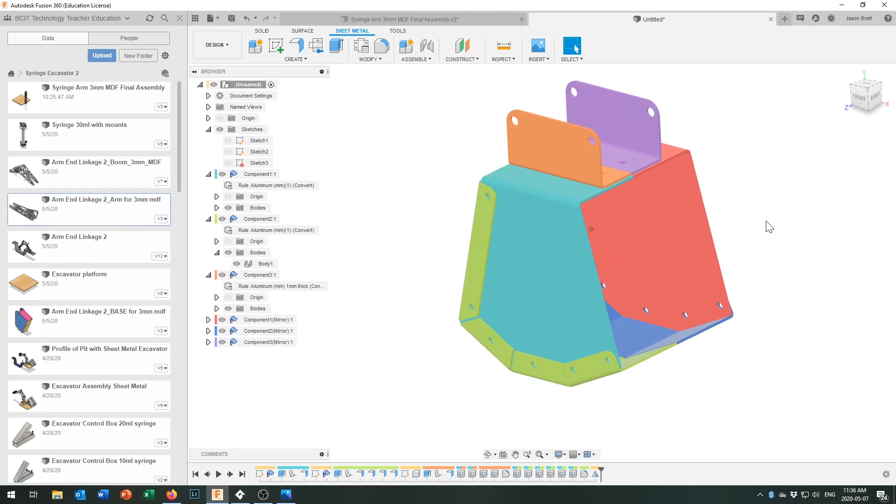You could play with the dimensions, build yours the way that you want. This is just some suggestions and some thoughts on if you want to make it out of sheet metal, how you could do that. Now, right now we want to turn these into single components.

So come back to our solids and we go combine 1 and 2. We're going to join those together. Okay, combine 1 and 2, join those together, and combine 2, join those two together. And so now you've got all your parts sitting right in here.

So what we'd like to do now is get some flat panel drawings for this so that we can print those out and take them into the metal shop, put them on a piece of sheet metal, and use that as our template for punching all of this out. We could also take them to a plasma cutter, water jet, laser cutter, whatever cutting machine you want, and we could definitely cut them out from right there too.

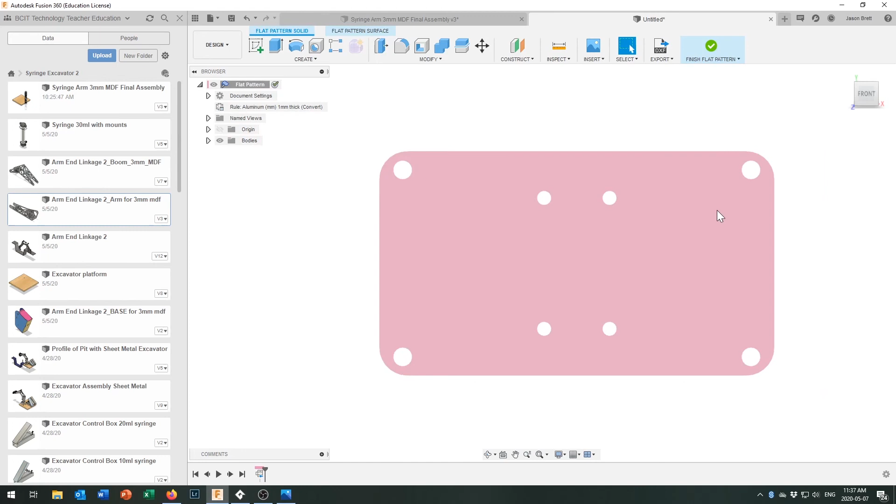So if we come into our sheet metal tools, we can come in here and we've got all our rules set up. And here we go, we've got create flat pattern. Just pick the stationary face of what it is that you want to create and say OK. And there is a flat pattern for that part. We can turn off our component color cycling toggle on there. And if we finish that flat pattern, it returns the folded model.

Before we do that, let's print that out. Okay, so we come in here to drawing, from design. Oh, we've got to save this part. So let's save it as sheet metal bucket. Should have done that right from the beginning. New drawing on A4 paper. Say OK. Takes a moment for it to think that through. And there is our base view. And we say OK.

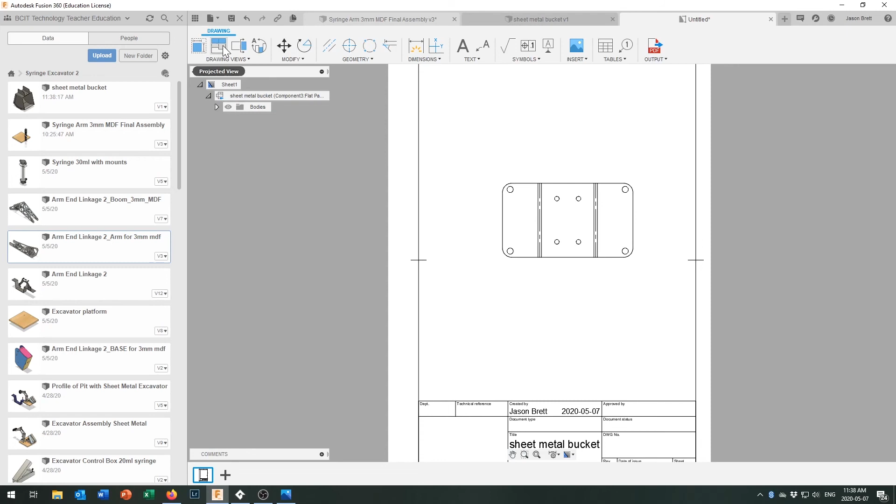And there you go. It's got your bend lines right down the middle, your allowances, shows you where to put all the holes. You can come in here and add your dimensions on here so you remember which size to punch which holes. Dimensions.

Let's see right there. That's not what we wanted. There we go, radius 4. Oh, sorry, diameter 4. Place that. Place that right in there.

And that should tell you pretty much everything you need to know about your part. But just to help somebody who goes to make this, we want the dimension between here and here, and the dimension between here and here. And you're saying, oh, there's some weird numbers showing up right in here. Well, don't forget, it's taken account the bend radius right in there. So you might want to dimension your bend line right in there as well.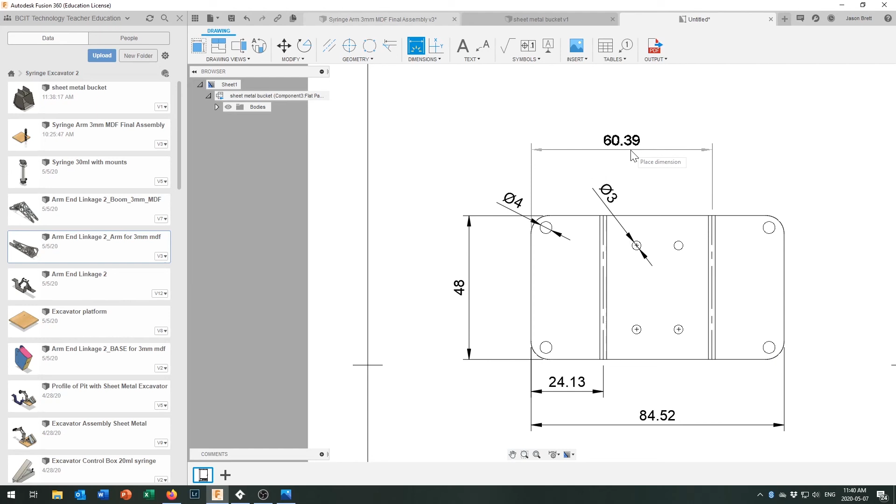And depending which end you're bending from, maybe you... I didn't leave myself quite enough space there. Put that up at the top. Not good dimensioning practice right there necessarily. Let's put some center holes for our circles. Just makes them easier to punch with a hole punch.

And there you go. That part is going to be available to print, and you hit your PDF or you send that out to your printer. You take that into the shop, just glue it down onto a piece of sheet metal, punch, punch, punch, punch, bend, bend. You've got your part. Remember to round off the corners nicely when you cut them out.

Okay, let's come back to our sheet metal bucket right now. We're going to finish that part of the flat pattern. Let's come in here and take this part of the flat pattern. So come in here and sheet metal tools and create flat pattern, and our stationary face for this one, we'll look at it from this side right here. Okay, and there is our bent out part right in there with all the holes in the right places.

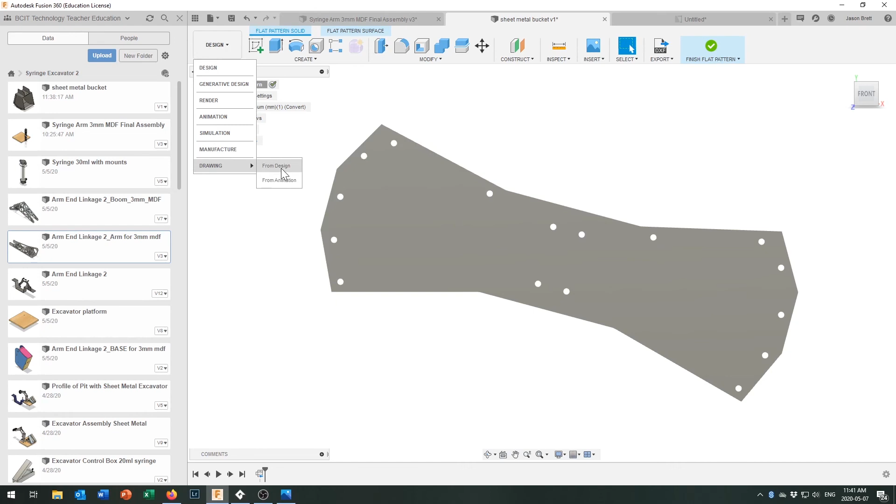And so let's come in here and create a drawing from the design of this part. And we'll put it on the A4. Let's go for the wider A4 paper this time so that it fits a little nicer. And oh yeah, make sure our scale is 1:1. There we go. Now there should be a way to rotate that drawing viewpoint, but I'm not too worried about that. And you can go through, center mark your holes, and do whatever you need to get that part to come out the way that you want. And it looks like all of these edges are big enough that you can probably find a way to cut them on shears.

Okay, the final part that we're going to need on here, let's come back to our sheet metal bucket right over here. We'll finish that flat pattern, is going to be this outside part right here. So we're going to create a flat pattern. We'll use that surface as our flat surface.

Oh, it didn't like that. What happened right there? Let's undo that, go back. Shouldn't complain at us like that. What's that warning showing up down there? Flat pattern 1 is giving us grief.

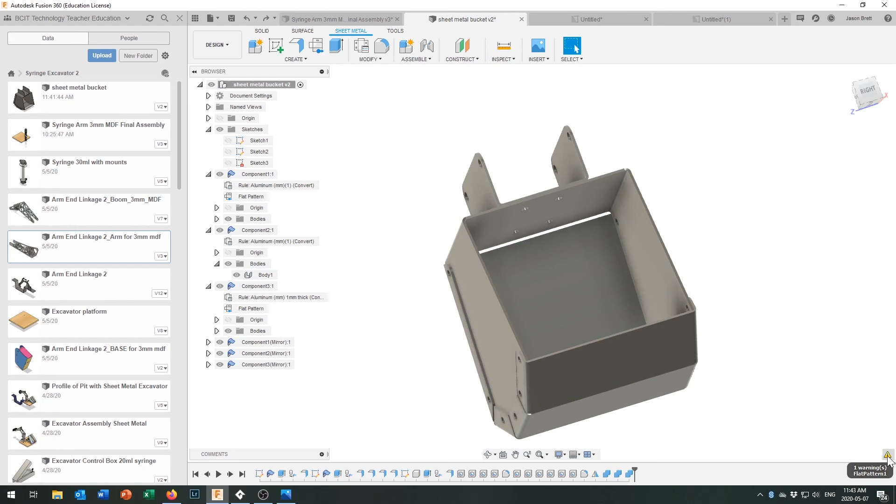We'll try attacking that flat pattern from a different point of view. Create flat pattern. Let's take a look at it from this side. Oh, it's giving us an error. Let's undo that again. Sometimes it'll give you that if it doesn't know how to create the flat pattern, but there's no reason it shouldn't know how to create that flat pattern.

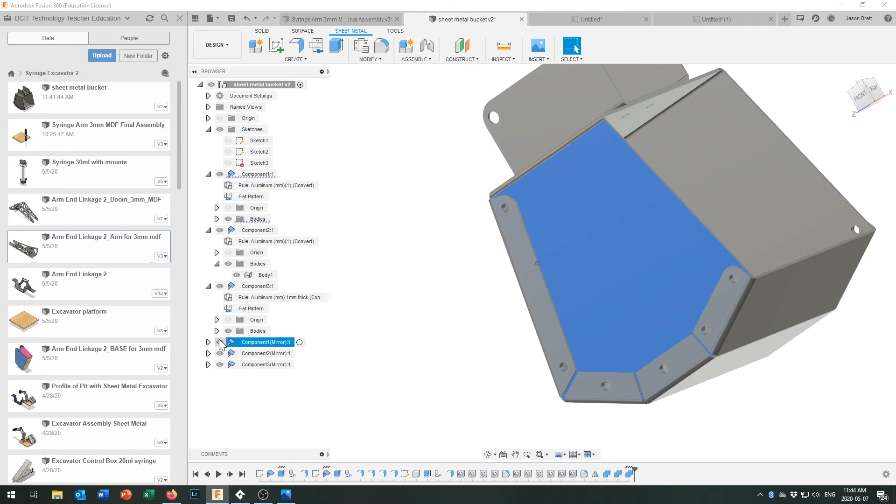Let's just turn off a couple of those other components for right now. We'll make them invisible. Oh, why are things not turning invisible for me in here? Those are all our mirrored parts. Component 3.1. Okay, that's in there, so we know which one that is. Let's go back to turn this on. Component color cycling. I want this green part right here. I'm going to turn off these other components just so that I'm not accidentally picking anything else up by mistake. There we go. Maybe I was only picking up part of the mirrored part or something in there.

So if you're having problems, again, turn on your color cycling and come in here and turn off the things that you don't need. You can just hide them by clicking on their visibility, kind of like layers in AutoCAD. Okay, create flat pattern, stationary face. Okay. More info. What's it doing wrong? It's not giving me any info on it.

Strangely, I had a very similar shape done up earlier, and it was working out beautifully.

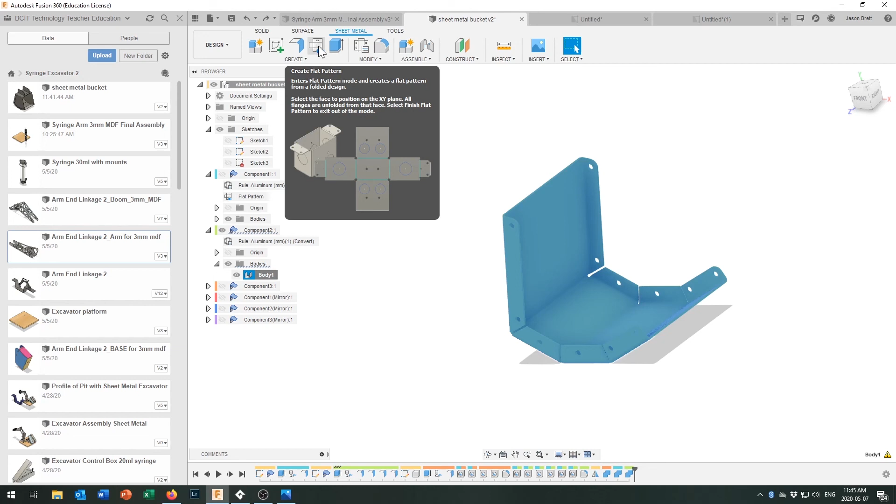Create flat pattern. Maybe it'll be happier if I pick something in the middle. It is really being nasty to me. Those other ones created so nicely. And there is nothing wrong in here that says that should not be able to form a flat pattern. That should be fairly easy to create as a flat pattern, in fact.

What's going on in here? Okay, if I turn that off, component 3, mirror 1, 2, 3. Okay, so those parts were the mirrors, and they just got combined right into here. Component 2, 1. There's component 3. Component 2 is that part right there, which makes sense. Should have given them names, of course, as we come along in here.

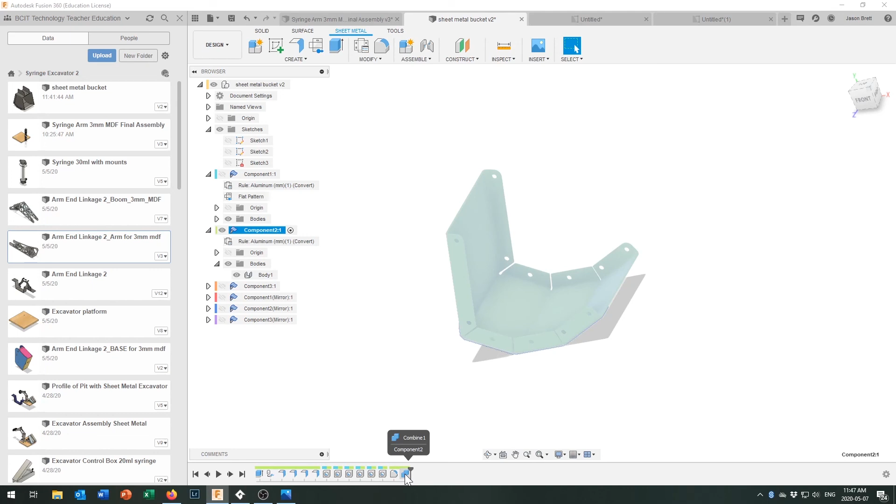And let's see, all of the parts for that. Let's come in here and let's just double click on that. Make this one the active component. And so I just turn that dot on so I can see its entire assembly timeline right there. And that all looks like it should make sense. And create flat pattern. Pick a different face. And it should be giving me the error info down in that corner to tell me what's going wrong and why it's not working. And it just does not want to create that flat pattern for some reason.

Well, we do have a couple of hacks and workarounds on that. And in this timeline right here, let's go back before we mirrored it. Okay, let's see if we can create the flat pattern of half of it, and then we can always just duplicate that.

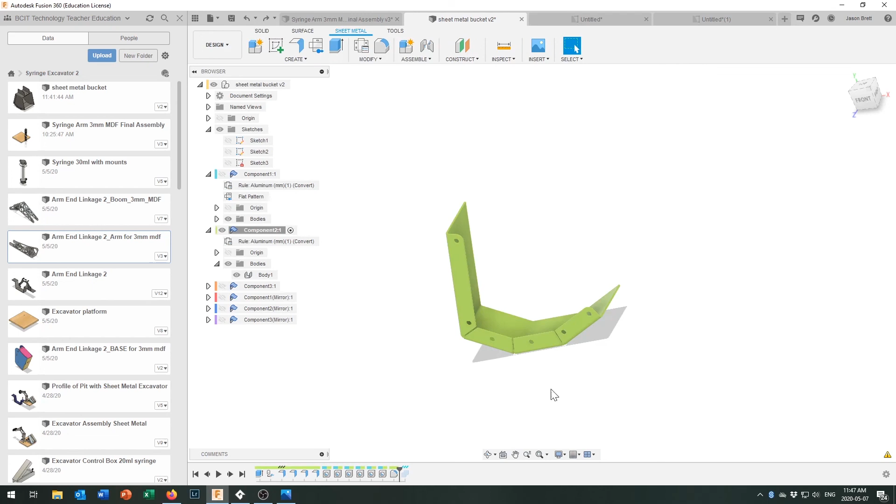It does not want to do that. Okay, well, a little disappointed in Fusion 360's flat patterning for me on this one right here. I'm sure somewhere out in Fusion 360 land somebody's going to say, oh yeah, you just clicked on the wrong thing right here, you can create a flat pattern for that. In fact, I expect your drawing is probably going to create that flat pattern just fine, but I'm having problems with the sheet metal tools right now.

I'm going to post this and let you work your way through that because I think there's going to be a solution to this, and yours is probably going to work out okay when you go ahead to create that flat pattern. It's a weird problem that I've clicked on something—I've been editing most of those out as we go along, but now that you're getting into Fusion 360, I think it's fair for you to know that I run into problems with it from time to time too, and I have to go back and sort them all out.

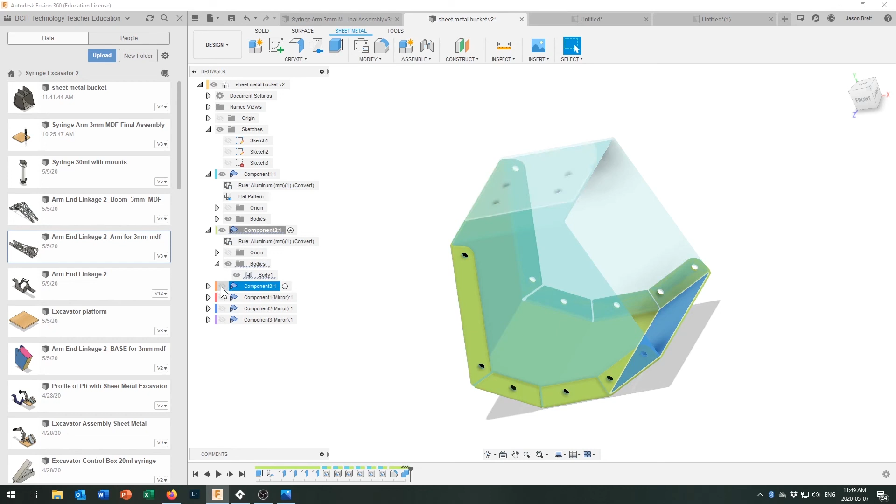Anyway, very cool way to go about creating flat panels for your parts, and then you can come back and see them all assembled. What you can do now that you've got this all assembled is turn everybody back on here. Component 1 is back on, component 2, component 3. We've got everybody back on there. Come back up here, activate the entire project, save this file.

Okay, now that you've got that assembled, you can come over to your arm. You can drag your new sheet metal bucket into right here. Drag it over here somewhere so you can see it. Say OK, and then find the hole. This hole right here is going to match up to that hole right there on the inside. So go ahead and assemble that, and let's capture that position.

Okay, careful to pick this hole on the outside surface right there. And then... no, not right there, cancel that. For some reason my 3D mouse is taking a moment to respond. There we go, you get hooked on those things, and when they don't work, capture position. I think that was just a little bit of lag actually as my computer was doing something else.

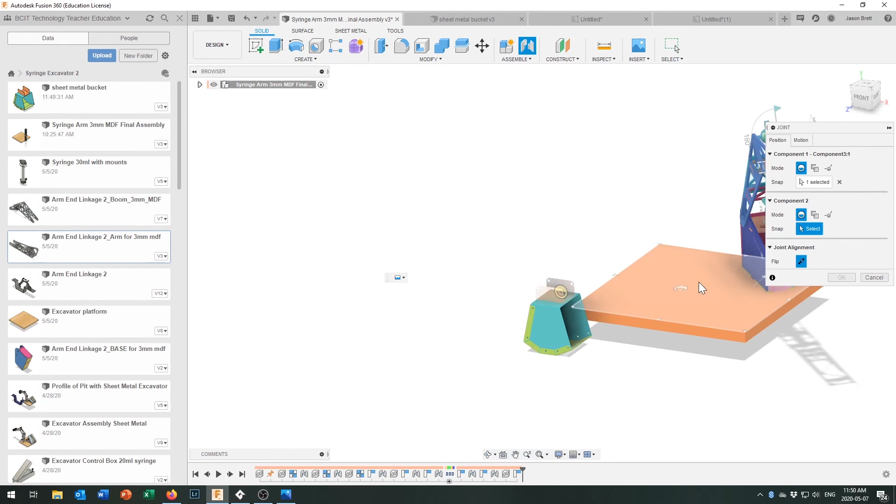So there is one hole right there, and that is going to come over and fit onto that hole right there. Flip that around. And that's looking promising right now. We want our motion to be revolute.

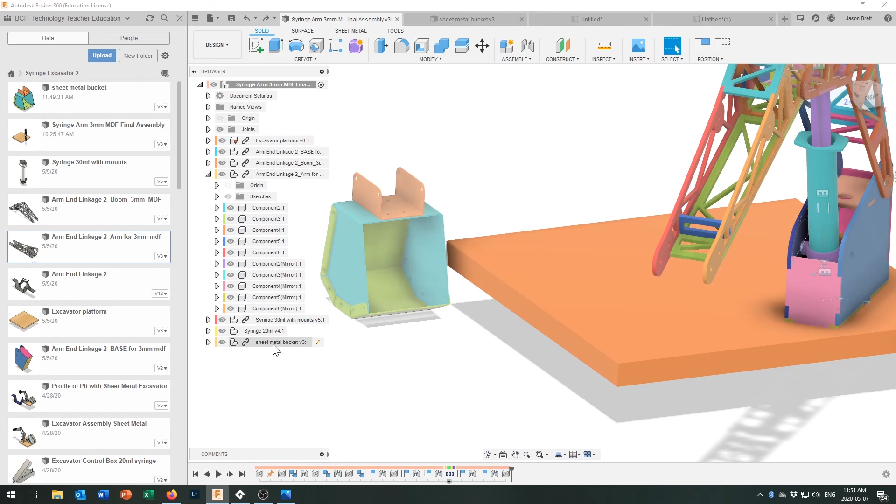And I forgot the first step that we had to do before. Undo what we've just done. Come back over here, and what we need to do is take a look in here and move that out of the way. Our sheet metal bucket, we have to remind that it is going to be a rigid group. Capture that position, and now we can come in here. With this being a rigid group, when I move the first part, everything all moves together. So create that joint.

Right there. To get in here and rotate this about just a little bit, so I can see into that arm right there. I'm in hole mode—did I click on hole instead of joint? Okay. Joint. I think I need more coffee this morning.

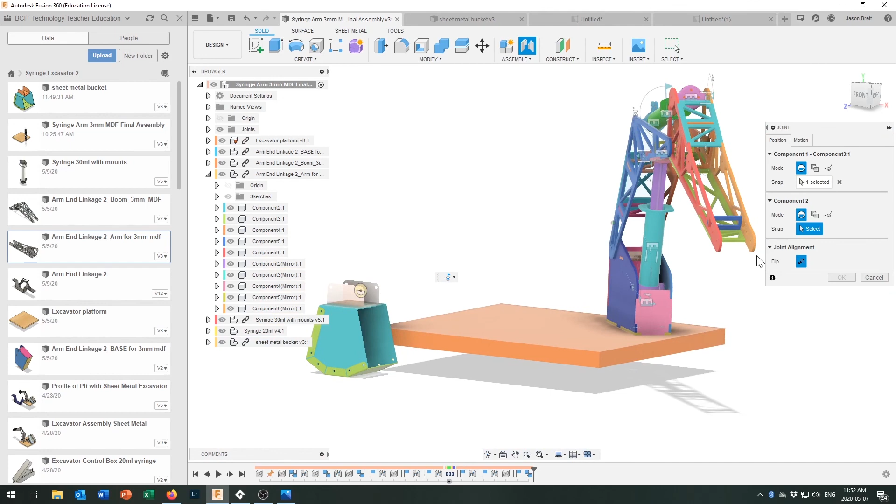That joint right there, it's going to come in and meet up with that surface right over there. It's flipped around backwards—it's a revolute joint. Let's take a look at that. That's looking okay, there is our bucket all the way over there. And now we can take that joint right in here. This joint that we just put in here is the bucket to arm.

Okay, and what we want to do is drive that joint to put it into a more rational position. Somewhere right in there looks good. You can take a look at this from the side, from the top, make sure that we don't have any conflict between parts. Everything fits in there really nicely. Drive that in—it will come in about that far. It's looking good, we can see.

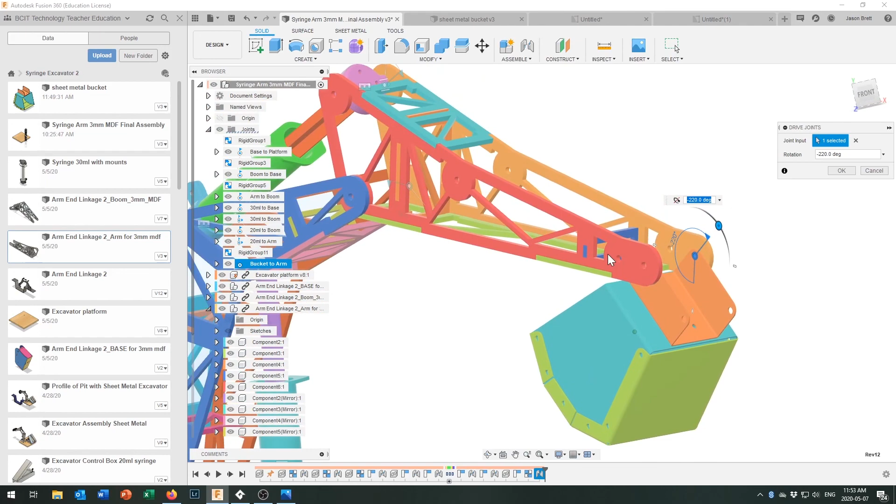Oh, I put it to the wrong hole. Oh no, that's the right hole. Let's see, we're not conflicting right up there. Don't have any interference, both our holes align properly. I bring it like that. We can see through both the holes, so we can run something right through there. Okay, now it's just a matter—you add your linkage in here and your 20 milliliter syringe, and you have a fully functioning arm.